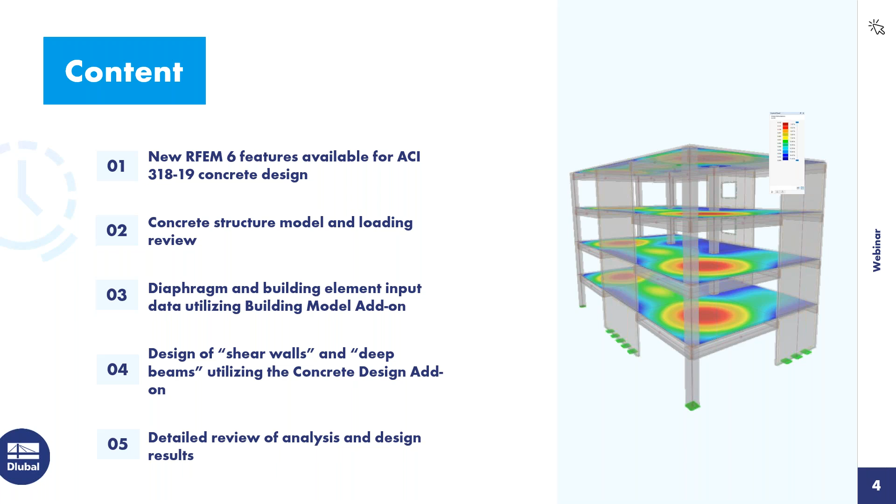For those of you not familiar with our program and the add-on concept, I want to quickly explain that for structure design related to concrete. RFEM 6 is the base program. This allows us to fully model the structure.

We can integrate with BIM software. We have access to all the materials and cross sections in the library, and this is also valid for hybrid structures as well. We can load it and then get a full static analysis.

If we want to take this a step further to design the columns, the beams, or the surfaces, we need the concrete design add-on that will go ahead and carry out the design according to the ACI or the CSA or other international standards.

We then have the building model add-on. RFEM is a general FEA program, but this building model add-on will release these building-specific features that now give us the ability to define stories as well as shear walls and deep beams.

Finally, there are many other add-ons that will be relevant, but for today I just want to mention a couple others that will be used in our example for dynamic analysis. This includes the modal analysis add-on and the response spectrum analysis add-on to generate those seismic forces. We won't be going into detail on these add-ons today, but we certainly have previous recorded webinars for both ASCE 7 and the NBC that go further in depth on this topic.

Turning now to the new ACI 318 features that have been implemented since our last webinar: we now have the ability to carry out the punching shear design check. This is for column-to-slab and wall-end-to-slab intersections. Currently, the design check will only flag the user if two-way shear reinforcement is required. There is currently no input option for that two-way shear reinforcement, but we do plan to add that in the near future.

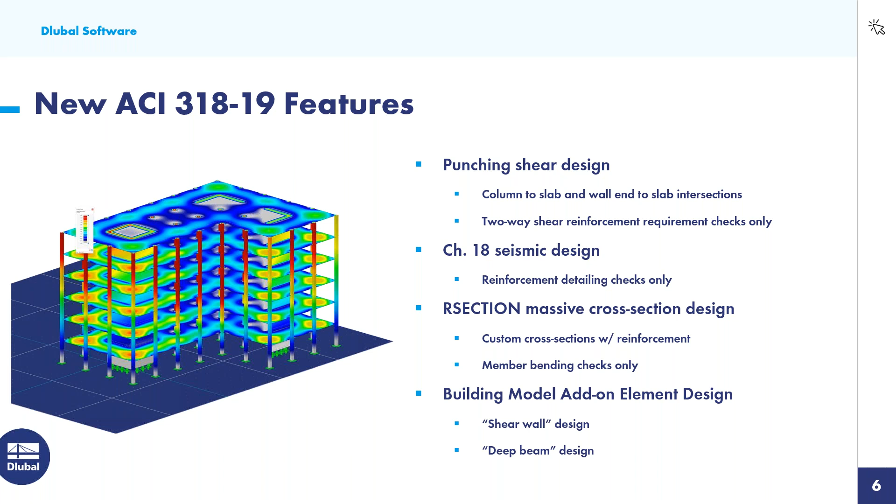And finally, we have the building model add-on that releases these building-specific features. Today we'll be focusing on shear wall design and deep beam design. So on the next slide, let us talk a little more about the shear wall design that we will see in today's example.

This does require the building model add-on integration in addition to the concrete design add-on. Essentially, we draw these shear walls with 2D surfaces within RFEM. When we define it as a shear wall, what's happening underneath the hood is that a result beam is created, and a result beam simply sums up the internal forces across this 2D surface and presents it in a beam-type manner.

We can also input the reinforcement under the shear wall dialog box. We have added this new cross ties input, which we'll see in our example today.

As far as the design checks, we will refer to chapter 11 for the in-plane design checks, as well as out-of-plane, in particular section 11.5. We'll carry out additional chapter 11 detailing requirements such as spacing and minimum reinforcement. And as mentioned, we also have these chapter 18 seismic detailing requirements, where we'll check the spacing and minimum reinforcement requirements here as well.

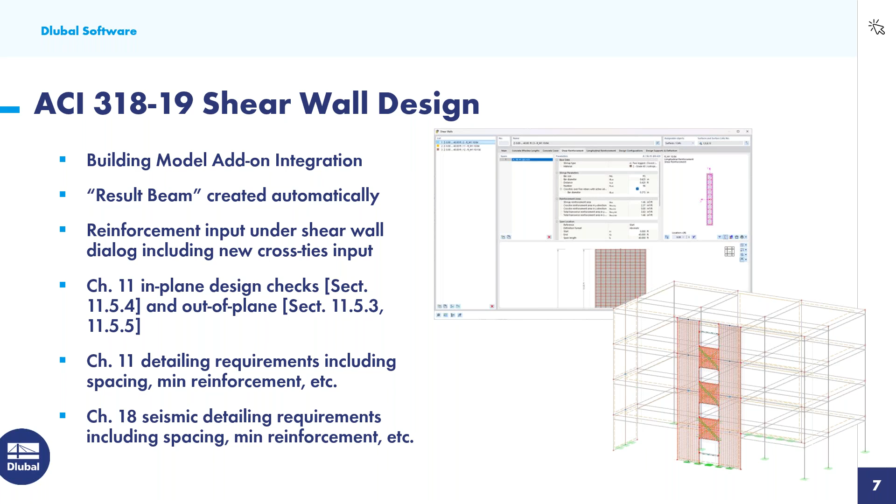Now, deep beam design follows very similar to the shear wall workflow, in that we do need the building model add-on integration. This is also defined as a 2D surface. We create this result beam underneath the hood, but instead of a vertical result beam for our shear wall, we have a horizontal result beam here to sum up all of the internal forces so that we can easily design this. The reinforcement input options are also available under the deep beam dialog box.

We have added the new diagonal coupling reinforcement input. As far as the design checks, we will refer to chapter 9 for deep beam shear strength and detailing design checks, and we can also consider those chapter 18 seismic shear strength and detailing requirements for coupling beams.

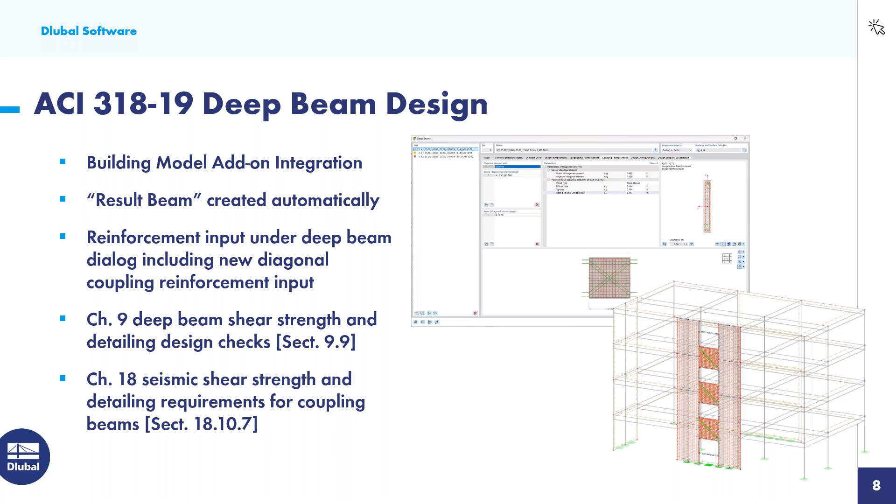With that said, we will now turn to our example within RFEM. When we begin a new model, we are presented here with the base data dialog box. Under the second tab are all of the various add-ons that we have available, so essentially you're creating a custom software package that's specific for your design needs.

For today's example, I want to begin by enabling the concrete design add-on, and then we also talked a little bit about those dynamic analysis add-ons that we'll utilize in our example here.

Under the third tab for standards, we can generate the load combinations automatically according to ASCE 7. You'll notice here the latest 2022 standard is implemented. We'll also take advantage of our automatic wind load generators as well as snow load generators.

So we can set the standard here under the second option also to ASCE 7. The concrete design is set to ACI 318, the 2019 standard, but you can see here the alternative standards that we have offered, including the CSA. And finally, dynamic analysis for the response spectrum analysis will be carried out according to ASCE 7.

Now that we have this information set, you'll notice here that I have gone ahead and modeled our concrete structure for today. So let's do a quick overview. We'll begin with the materials. Everything is defined here with 5,000 PSI concrete that was implemented or pulled in from our material library.

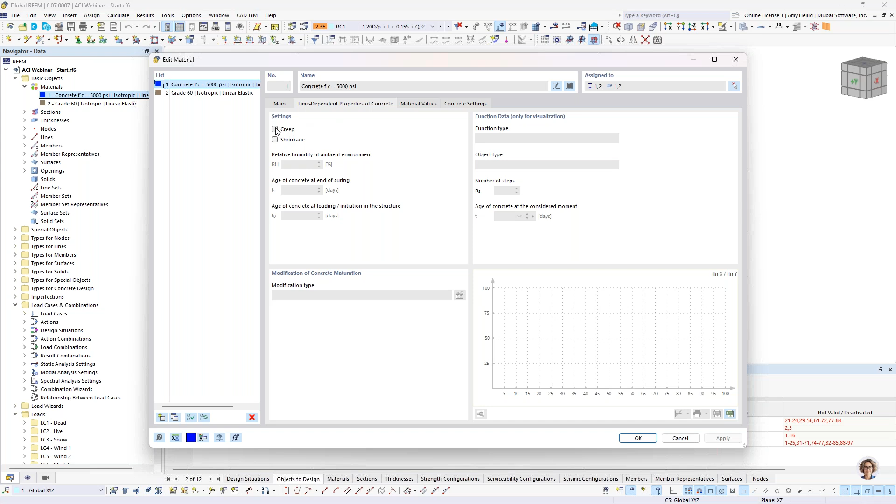Specific to concrete, we do have this second tab available to us under time-dependent properties of concrete, where we can further specify the creep and shrinkage behavior of this material. This will come into play a little bit later on for those time-dependent deflections. If we do specify creep and shrinkage, we will refer to ACI 435 for that consideration. For today, I'm not going to take advantage of anything related to the creep or shrinkage input.

So we will now move on to the cross sections. You'll notice here that the columns are defined as 20-inch by 20-inch square sections, and then we have various beams here that are supporting the slabs and spanning in between the columns.

If I zoom in here and double click on one of these members, I want to point out that the member type is not set to beam. So a beam is any standard column or beam element, but rather this is set to a rib. When we specify this under this second tab, rib, we can actually define here the effective width on the left and right hand side of this beam element.

So then we further have the ability to integrate the internal forces closed from the slab element itself from the static analysis, and then we can design it as a T-beam within the concrete design add-on.

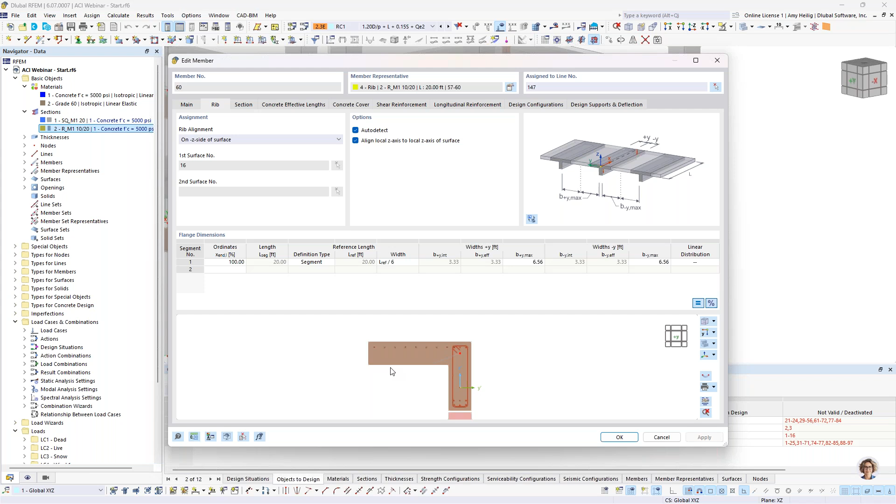Now for this rib element, we're at the edge of a slab, so we only have effective width defined here on the left-hand side. But this is unique to rib elements rather than a standard beam element. We also have the thicknesses defined here, assigned to the surfaces.

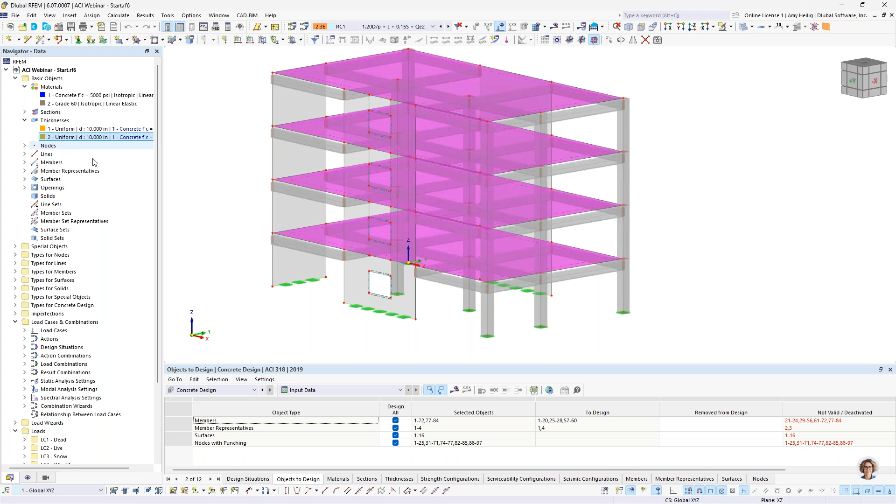For our shear walls, we have 10-inch thick concrete defined, and for our slab elements, these are also 10-inch, 5,000 PSI concrete. Down at the base of the structure, we have nodal supports at the columns that are rigid, and we also have a fully rigid support at the base of our surfaces, defined as a line support.

So we'll now move on to a loading overview. Going into the load cases and combinations dialog box, you'll notice under the load cases that I have defined dead, live, snow, and wind.

These are our static load cases. Once we have these defined within this dialog box, we actually need to apply the loads graphically to the structure. So we'll go back and take a look within our drop down at the dead load case. Self-weight is automatically considered internally for all of the elements, but I have added an additional surface load here of 50 pounds per square foot.

Now, we are not confined to applying a surface load, as you can see with this option in our toolbar, to the entire surface itself. Rather, we also have these options next to it called free loads. For example, a new free rectangular load could be applied to just a certain portion of the surface rather than the entire surface as a whole.

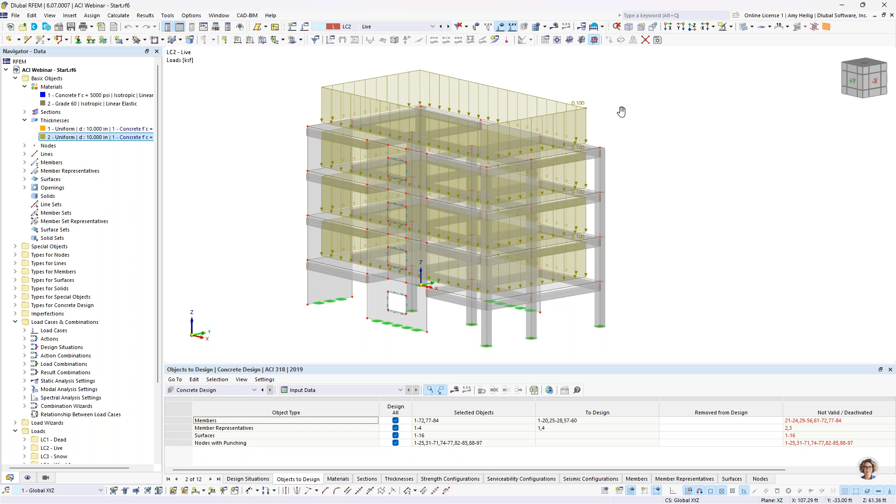We also have the live load case here, same concept. The magnitude for the surface load was increased to 100 pounds per square foot. Then we have our snow load here at our roof level.

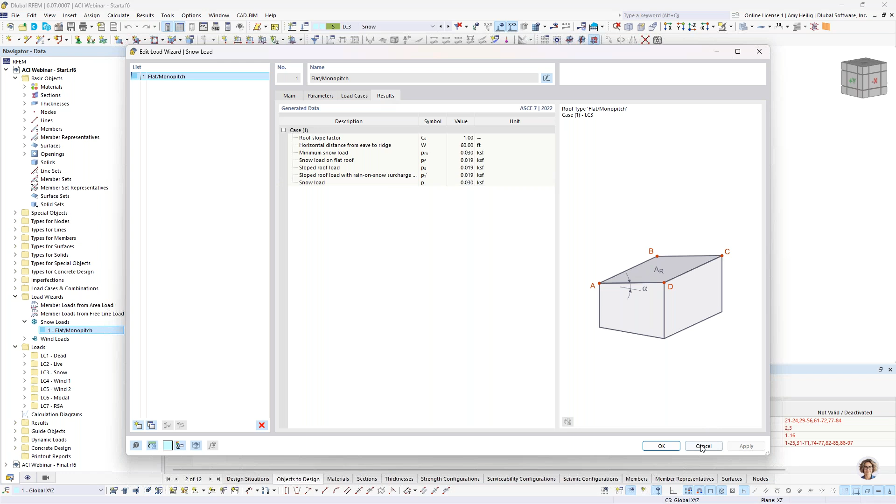And for this, I took advantage of the load wizards that you'll find in our dialog box. Under the load wizards, we set this to the ASCE 7 so that we can automatically generate the snow and wind loads. If I go into this dialog box, you'll notice that we just specify the geometry, input in the parameters specific to the ASCE 7, and ultimately the program is going to calculate these snow loads for us.

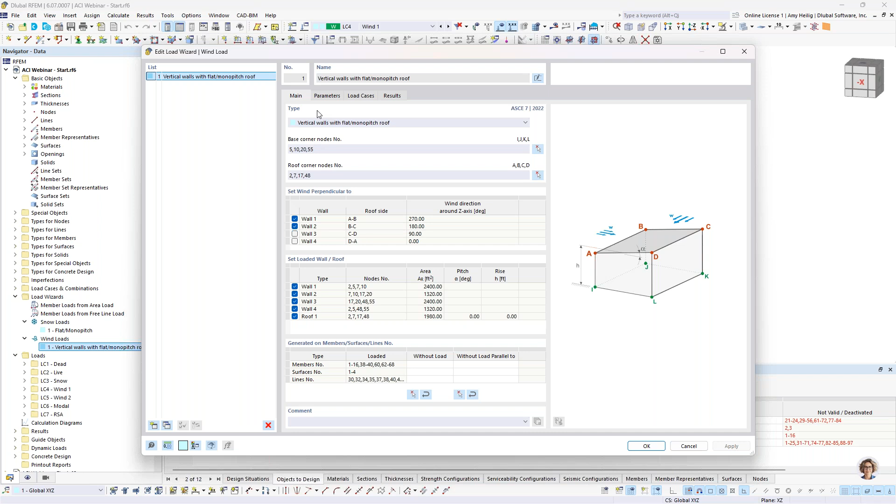Now, very similar, we have our wind load generator. If I toggle here to my wind load case, we see this applied lateral load. I'll go into the wind load dialog box here. Again, we input in the geometry points, the type of roof, and the parameters specific to the ASCE 7, and then the program can generate all of the wind load cases from case 1 and case 3 from the ASCE 7.

For this simple example, I am just generating the minimum wind loads in both directions, so that's why everything else is unchecked here. So for our first minimum wind load, we can see this applied area load laterally here in the global Y direction.

If I'm interested, I can always right-click to display separately, which is going to show me the loads applied to the structure based on the tributary areas. Now, if I'd prefer, I can turn this back off for a cleaner area load display instead. And then similarly, we have wind load in the other direction with that applied area load.

So going back to our load cases and combinations, I also have a couple of dynamic load cases here as well. I'm not going into detail with this, as it's covered in those previous webinars you can find on our website and YouTube channel, but we do have a modal analysis load case where we're going to carry out the eigenvalue analysis to determine the natural frequencies, vibrations, and mode shapes of the structure.

We can import in here a mass combination for this calculation. And then we also have our response spectrum analysis load case, where we're going to refer to the ASCE 7 to generate these seismic loads in the orthogonal X and Y directions. And ultimately, once we have all of these load cases set, we need to combine them into the load combinations.

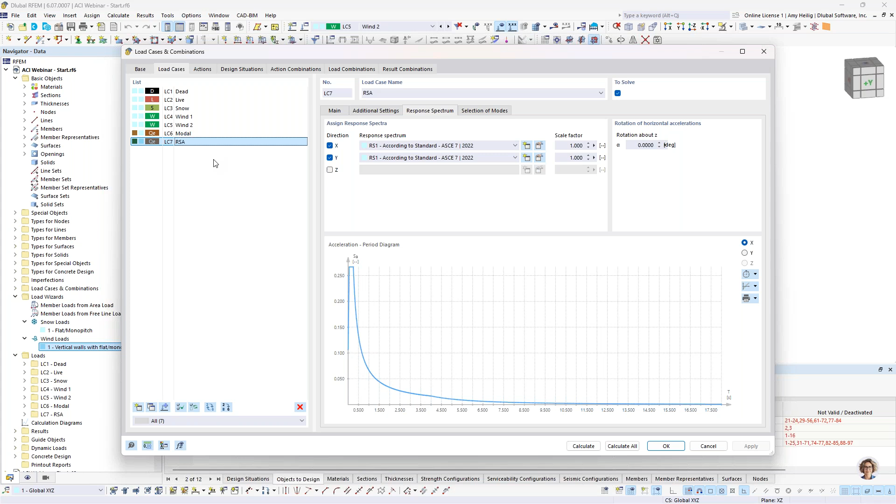Under the design situations here, you can see that the program automatically groups together these load combinations into what we call a design situation. So we have our first two design situations here in orange that include our factored load combinations from ASCE 7, 1 through 5.

And then this second factored design situation includes all of our seismic loads, combinations 6 and 7, directly from ASCE 7. We can click this info button here to see that information pulled directly from the standard.

Now we further have a couple design situations here for our unfactored loads: the ASD load combinations 1 through 7, and then 8 through 10 that include those seismic forces. These design situations are ultimately needed within the concrete design add-on, and we'll see later exactly how we assign the limit states to these different design situations. For now, just think of these design situations as grouping together the load combinations.

If we're interested, we can click on the load combinations tab and see the load combinations listed out individually. Our factored load combinations in orange belong to that first design situation, and we have our unfactored load combinations here belonging to the third design situation.

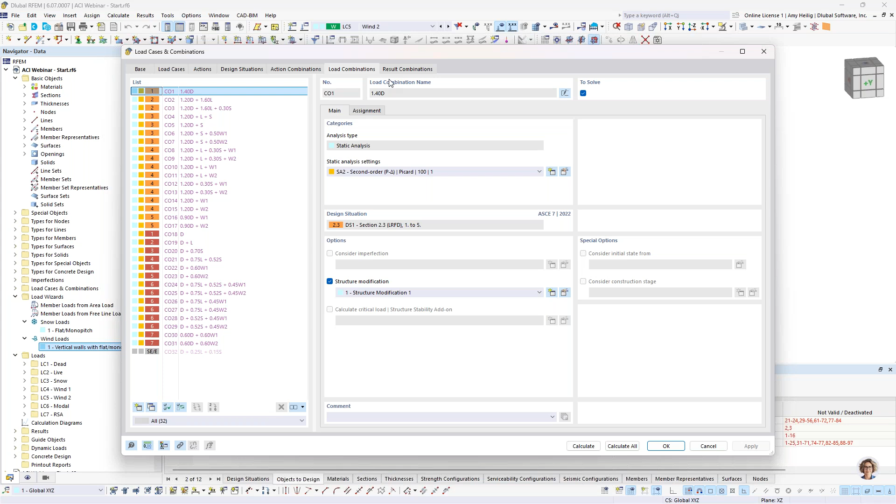This is different from a load combination that is automatically carried out according to a second order analysis considering P-delta effects. Again, this is covered in the response spectrum analysis webinar, but ultimately these result combinations also belong to those design situations.

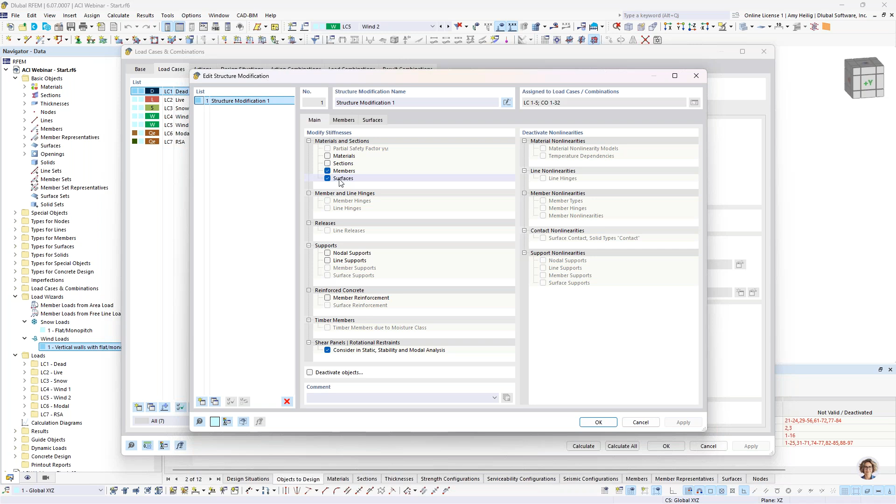One more thing I want to touch on is that for the load cases, I have a structure modification set here, and this is really important for concrete design. If we take a look at this definition, I have enabled both members and surfaces because these are the two elements we have in our model today, and then I get two additional tabs up here at the top.

Within my first definition type here for members, we have the ability to directly select ACI 318, which refers to table 6.6.3.1.1(a) to apply those I-crack factors to our member elements within the model. We would want to select whether this is a column or a beam, and we can see the relevant stiffness modification factors given here.

So once we have this definition, we can graphically select all of the column elements within the model that this stiffness reduction should be applied to, and the same exact concept applies for our beam elements.

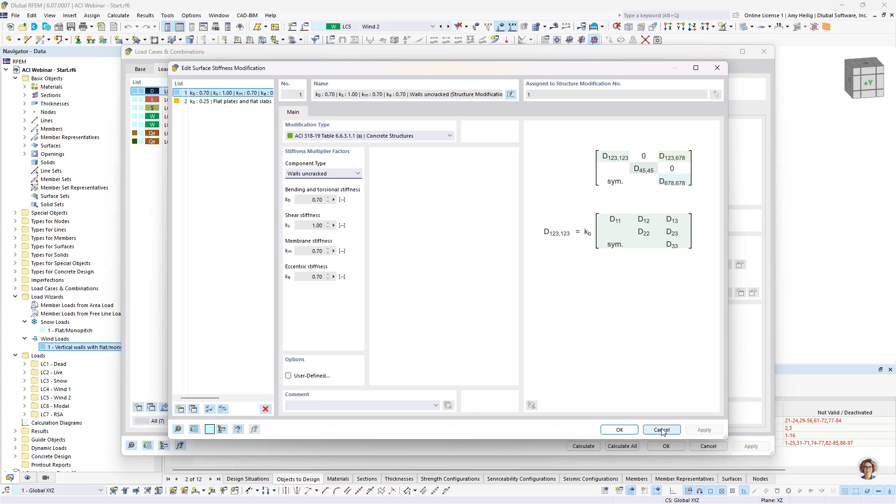In a very similar manner, we also have the surfaces tab, where I created my first definition by simply selecting ACI from this dropdown, then choosing whether it's walls uncracked, walls cracked, flat plates, or flat slabs. This refers directly to the ACI for those I-crack factors, and then we can graphically select the surfaces that this stiffness reduction should apply to.

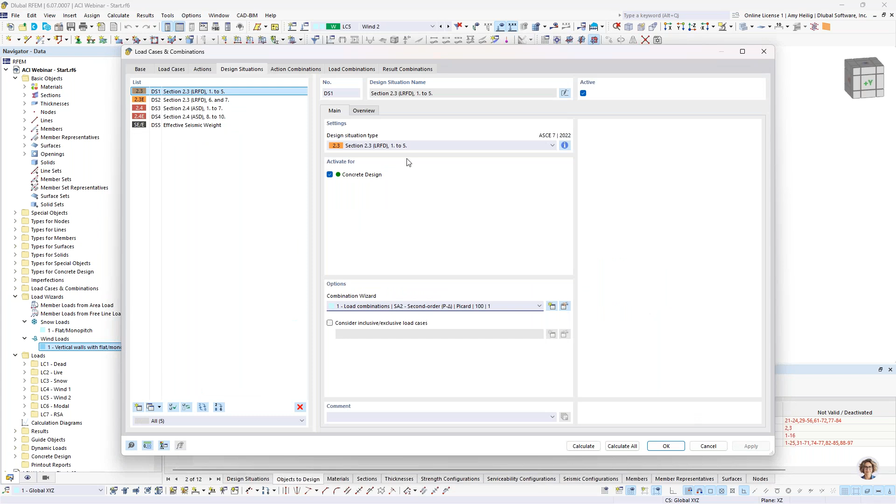So we could go ahead and apply this to all of our load cases. It's also possible, under our design situations, especially these factored design situations, to go into the combination wizard options and activate this structure modification there as well. By doing it within the design situation, you'll see that the load combinations automatically include those I-crack factor stiffness reductions as well.

So now that we have covered the loading and the structure, it's time to input the reinforcement specific to the concrete design add-on that we have already enabled within the base data dialog box. Before we begin, notice that we have the concrete design option available within the dropdown of our table. When we select this, there is an option called global settings.

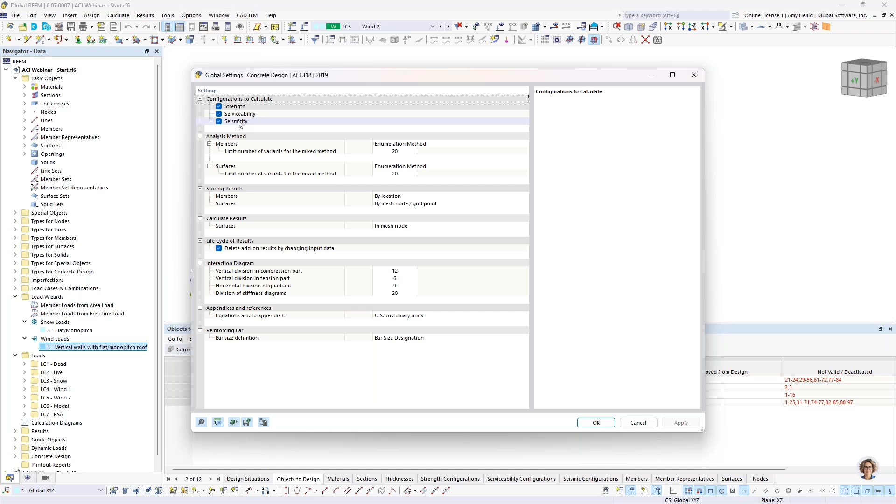By default, the strength and serviceability design checks will always be carried out. But if we want to further carry out those seismic detailing checks, we would want to go in here and turn this on, because by default this is typically not enabled. So we'll go ahead and do that for today.

Okay, so we want to talk about the reinforcement input for a column. If I double click on this column, you'll notice that the design property checkbox is turned on. This is telling the program that not only are we interested in carrying out the static analysis within the base program, but I also want to utilize that concrete design add-on to input the reinforcement.

Now, when I turn this off, you'll notice all of these tabs disappear. This is simply telling the program that we're only interested in the analysis. So we certainly could carry out the reinforcement input here within this single column, but I do want to talk about the benefit of what we call member representatives.

Currently I have this turned off graphically within the model, so I'll go ahead and turn that on. You'll notice that we have a lot of color-coded dots here for each one of these members. This is because the program has grouped together identical members in what we call member representatives. Members that have identical cross-sections, materials, lengths, and possibly even for concrete, the same reinforcement input will all be grouped together here.

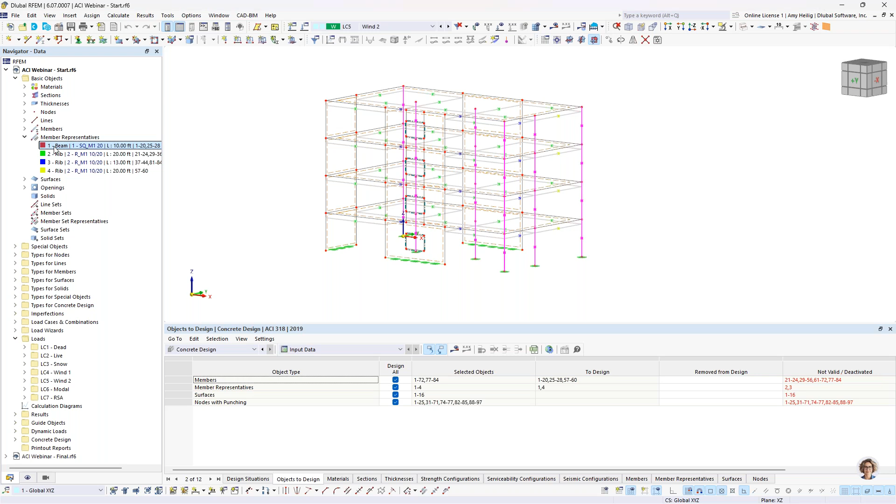Now, the benefit is that if I take a look at member representative number 1 here, you'll notice that this has grouped together all of my columns. We see this highlighted in the background. Well, I have these exact same tabs here to input the reinforcement as I do with the individual columns.

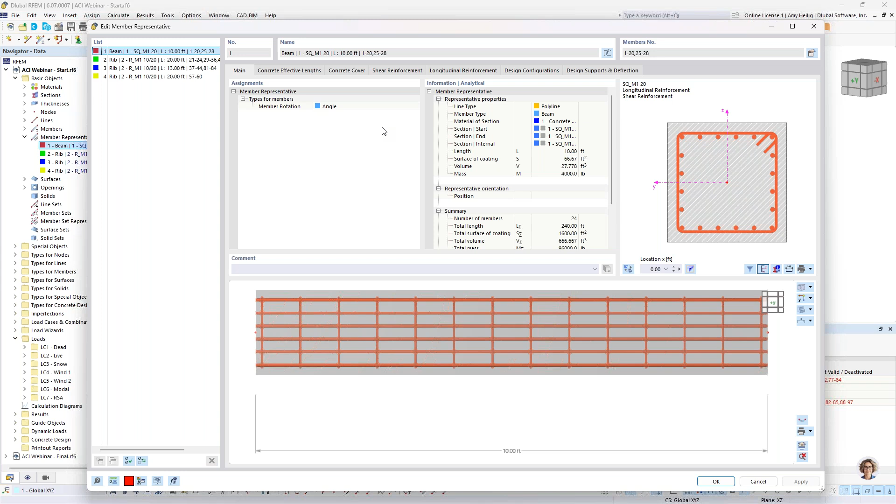The benefit is that if I define the reinforcement here within the member representative, it's applied to all columns at once. If I need to go in and make a change, I do it within the member representative, and again, it's going to affect all the columns defined here. So we will go ahead and input these various tabs, and I'll go through these in detail.

The concrete effective length: if we are carrying out a first order analysis and utilizing the moment magnification method, we would want to go ahead and input an effective length. However, if we are designing to second order analysis and considering P-delta effects, which we are within our load combinations today, we don't really need to do anything within this particular tab. So we'll go ahead and design according to second order analysis.

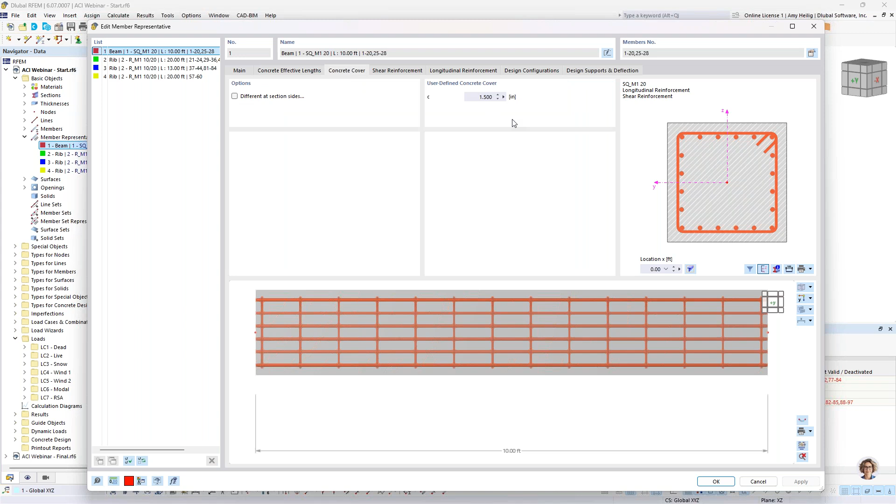Now the concrete cover should be input. This is left here at 1.5 inches, which is the default.

Now I went ahead and input the shear and longitudinal reinforcement for these members, so we'll just go ahead and give a quick overview. The shear reinforcement is set at number 4s at 9-inch spacing on center, so we can see that spaced out evenly along the member here.

Now it's entirely possible to create different zones for both our shear and our longitudinal reinforcement with this option in the lower left-hand corner, and then we can modify the span location. So for example, if we wanted maybe closer spaced shear ties at the ends of the member versus the center, we could create a couple different zones here.

The longitudinal reinforcement, you'll notice here that I have selected the option from our dropdown as uniformly surrounding for the longitudinal bars. I have defined 20 number 6 bars, so the program will go ahead and place these around the cross section as shown.

Now we do have additional options here to define a development length if we would like. You can see that within the dropdown box here where we can see the development length shown graphically. We can modify that development length itself in terms of feet. For today's example, I'll go ahead and leave all of the development lengths off, but that is where you would want to input that information.

Now, the design configurations - I'm only going to go through this tab once because it's the exact same application for all elements that we are designing. We have here these strength configurations to begin. If I go into the default setting, you'll notice that we have 4 different tabs depending on which element we're designing, whether it's a member or a surface or even punching shear. These are going to be all of the various options specific to the strength design checks according to ACI.

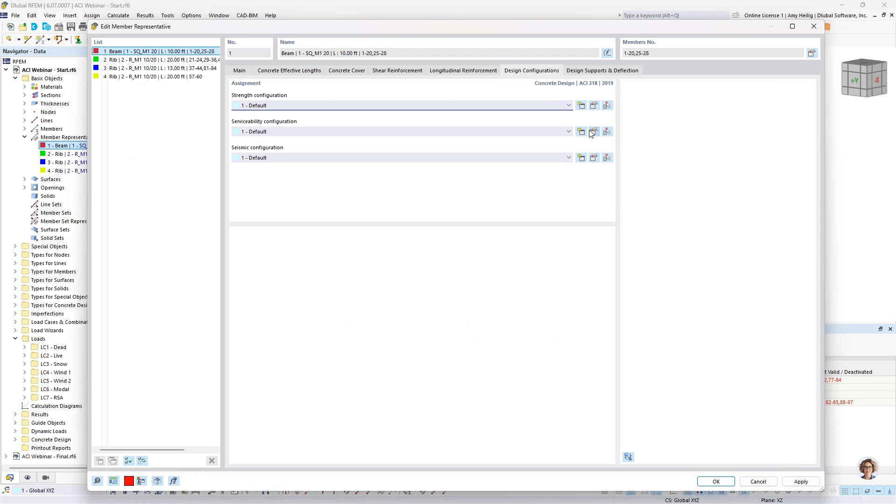We also have the serviceability configurations here. Again, this is specific to the serviceability design check. For example, we can calculate the crack width. For surfaces, we have minimum reinforcement due to shrinkage and temperature. We can also check deflections, whether that's simply supported or cantilever beams or columns, and this can also be carried out for surfaces.

And if you remember, we talked a bit about time-dependent deflection. I mentioned that under the material properties, when we input creep and shrinkage for that material in more detail, we probably want to toggle this to refer to ACI 435. This is a far more complex approach within the serviceability design checks for long-term deflection.

Alternatively, when we leave this as default with the factor according to ACI table 24.2.4.1.3, we're simply going to apply some type of factor to the immediate deflection based on the duration of the load—a much more simplified approach.

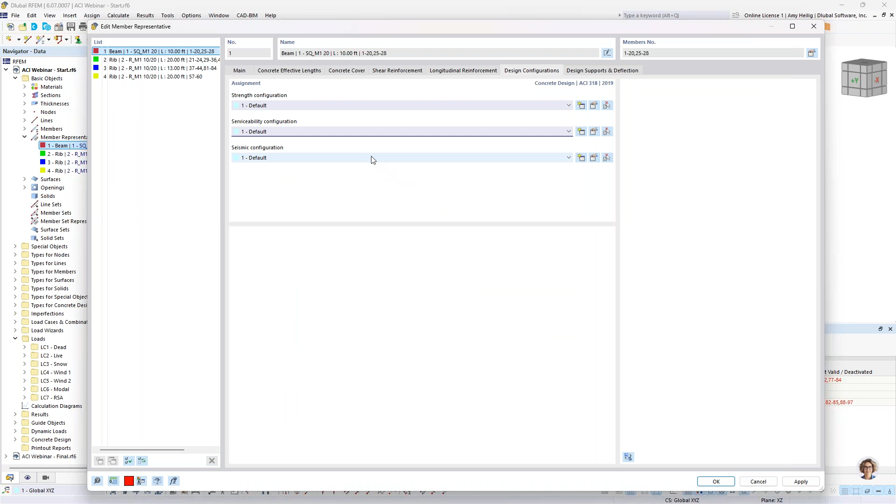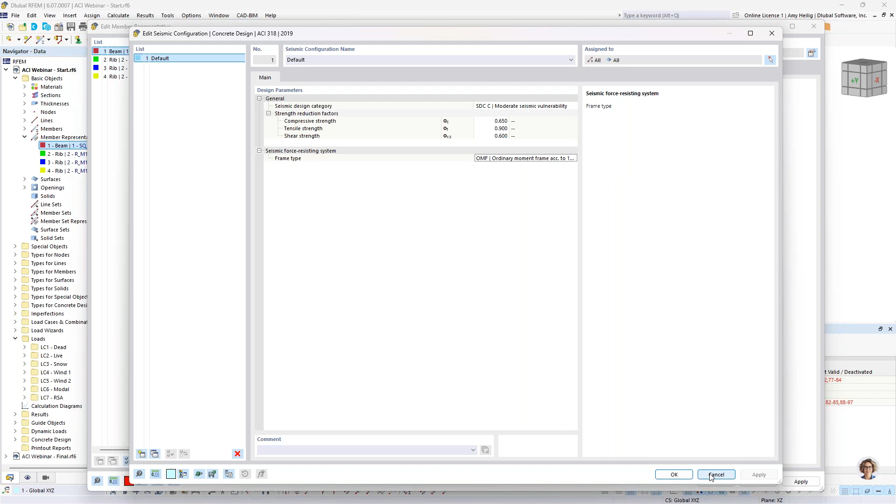Okay, and finally we have the seismic configuration. For the seismic detailing checks, we can select for our members whether the seismic design category is one of the options from this drop-down. We also have the frame type here, set to ordinary, intermediate, or special moment frame. This is applicable to members and surfaces for those additional detailing design checks.

And finally, we have the design supports and deflection. If I input nothing within this tab, the program assumes this member is supported at both ends and refers to the limiting deflection ratio for simply supported members. In contrast, if we have a cantilever, we probably want to assign a design support at the left or right end so the relevant deflection limit is referred to. I'll leave this as simply supported for our column elements, but we'll see in a minute how we can set this differently for our rib members.

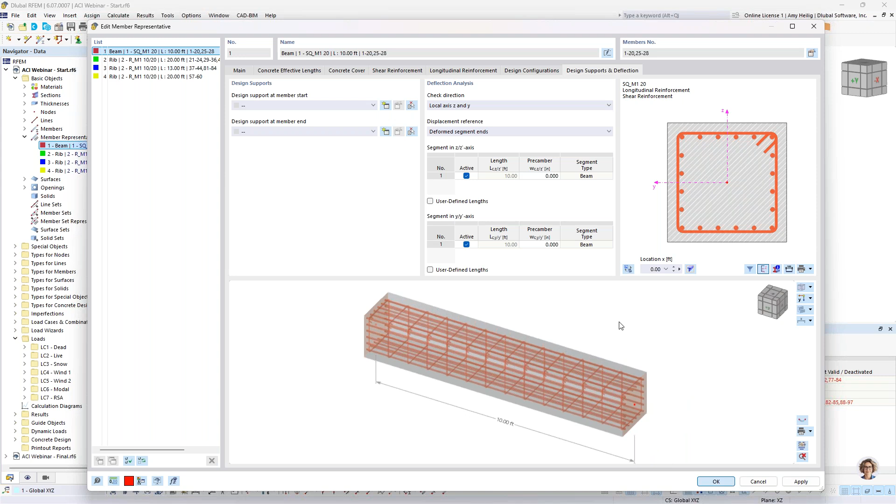So once this information is done, we want to move on to the reinforcement input for our rib members over here on the right-hand side. Very similar to the columns, these are all grouped together in a member representative as well. If we take a quick look to review this, because it's a rib member, we include the effective width of the slab for the member design. And we run through these various tabs.

Concrete cover is set to 1.5. The shear reinforcement is number 4, set at 6 inches. Again, we could set different zones if we would like.

The longitudinal reinforcement is going to be a little more detailed than what we saw with the columns. You'll notice I have 3 number 6s set to symmetrical, so this places 3 number 6s at the top and 3 at the bottom, currently highlighted. We also have an additional 3 number 6 bars defined at the bottom with what we call the rebar type line.

This line option allows me to place a line of reinforcement, and I can specify the different offset either left, right, top, or bottom with this input option. Finally, we have 8 number 6s defined in that surface effective width itself, also defined with the line option. I modified the offset here to 8 inches so we can input this longitudinal reinforcement within the slab element. This is pretty simplified for today since we'd probably want to create different zones with different longitudinal reinforcement, but this is just a brief overview for this simple example.

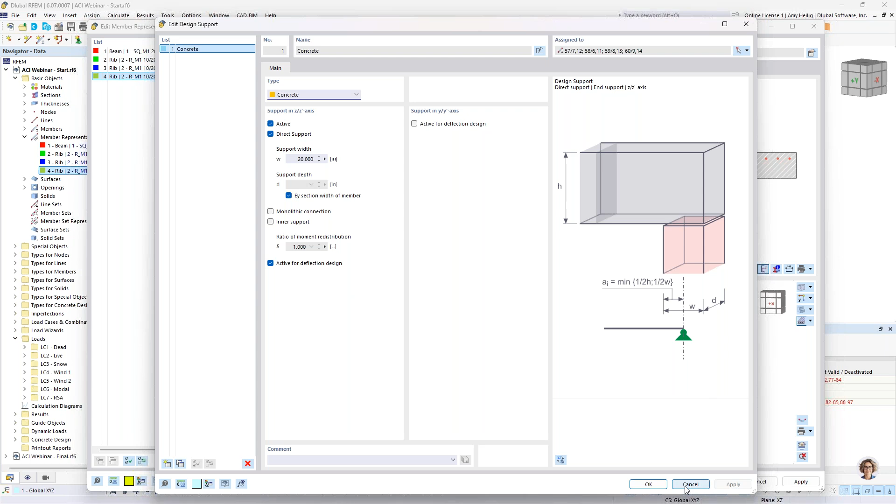Once we create that support, we can select that same definition type here at the member end, and we actually see the support shown graphically in this dialog box. So this is how we can consider that reduction of the shear force.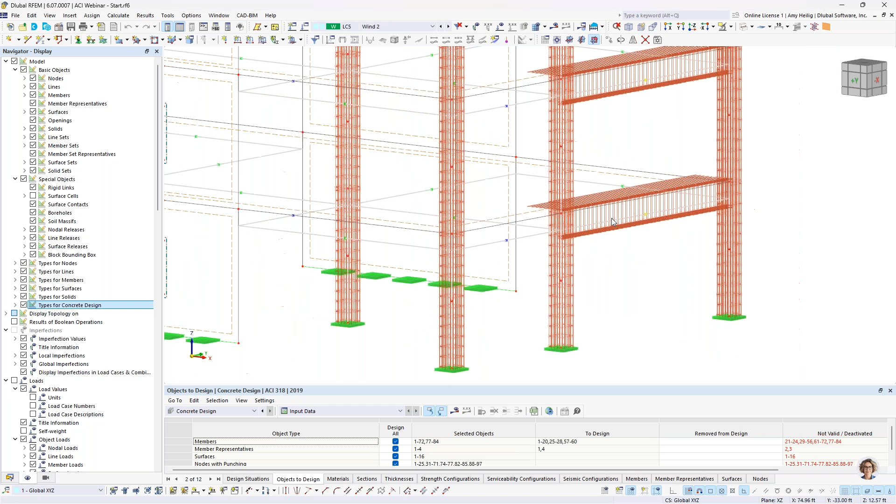Now that this information is input for our beams and columns, if I go to my second tab under the navigator and turn this into wireframe view, we can actually view the reinforcement that we have input graphically in the global 3D model. This is only specific to the elements I have defined so far. If you feel that's a little overwhelming, you can always turn that off.

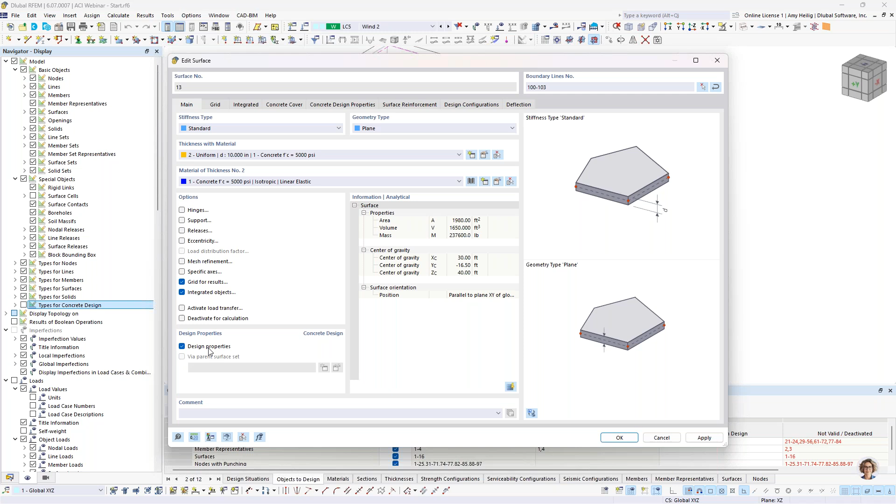Now, to talk about the surface reinforcement, I'm not going to go through this. This was covered in a previous webinar, but it's the exact same concept where we can activate the design properties and input the surface reinforcement. Similarly, for punching shear checks, we want to choose one of these nodes where it's framing into that reinforced slab, and double click on it. Very similarly, we have a checkbox for punching design and an additional tab that refers to the strength configurations for those punching design checks. We won't be doing either one of those for today's example, but I just wanted to mention that.

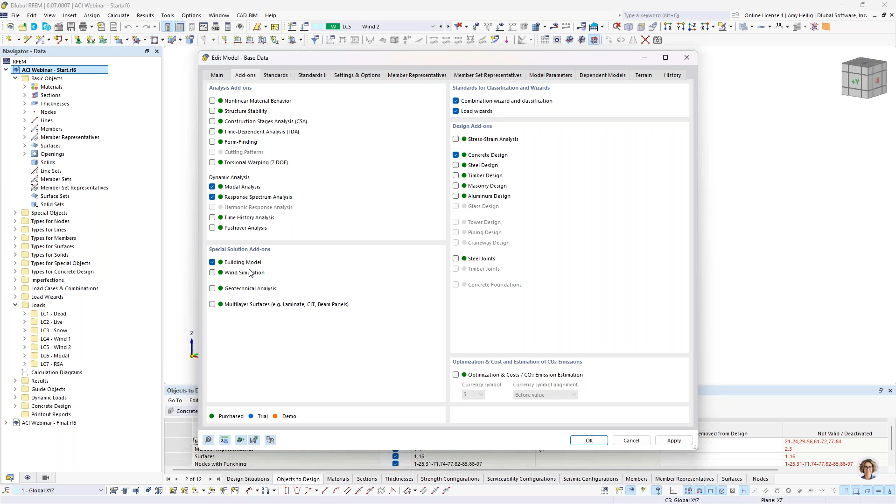So now it is time to move on to the building model add-on. For this, I want to right-click to activate the base data dialog box, and under the add-ons, we will turn on the building model add-on. I click OK. At first glance, nothing changes graphically here.

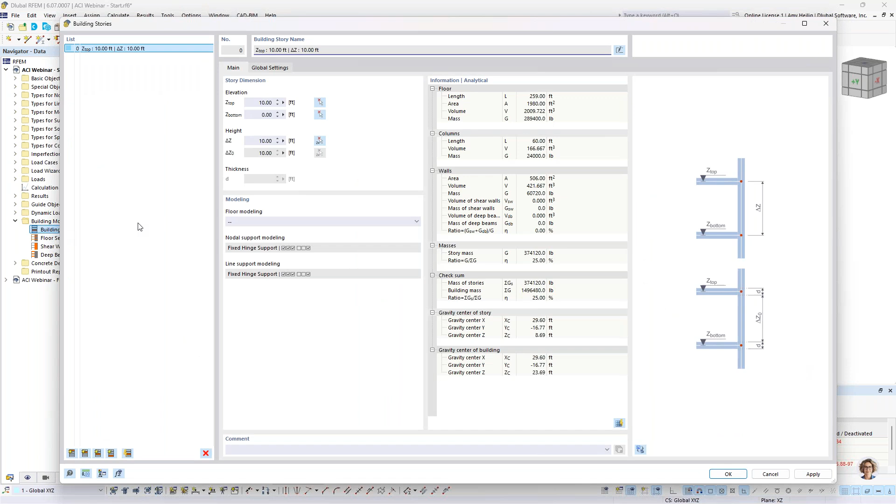The only thing we now have access to in our navigator on the left is a new folder called the building model. So we can now define our building stories in this general FEA program. I'll double click on this dialog box, and the program will automatically assume we want to create our first story, detecting the height of that first level. We'll continue to create the additional stories above it with the option in the lower left-hand corner, for a total of 4 different floors.

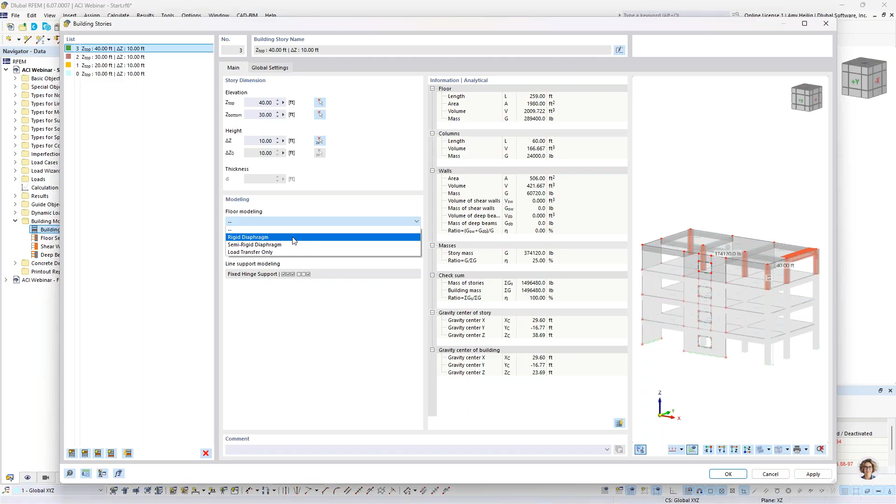Now, once we have created the different stories, for each one of our floors we now have the ability to assign a diaphragm to this particular floor or to all of the floors, including rigid, semi-rigid, and load transfer only. So let us go back to the PowerPoint because I do want to discuss the building model add-on concept in more detail, as well as these different diaphragm options.

As mentioned, RFEM 6 is a general FEA program. We are not restricted to only building analysis and design. Rather, we can model tanks, silos, fabric tensile structures, maybe an FEA of a steel connection. Really anything is possible. But this building model add-on is releasing building-specific features in this general FEA program, such as the ability to define stories. We also have the option, which we'll see in just a minute, to define shear walls and deep beams.

The added benefit of the building model add-on is that once we run the static analysis and even the dynamic analysis, we get additional results available in table format for results by stories. For example, if we're looking at a response spectrum analysis, we can actually view the story shear or the base shear in table format. For static or dynamic analysis, we can also view the shear wall forces in table format, and export that out to Microsoft Excel quickly. If we have a rigid diaphragm, we'll be able to view in the table the center of rigidity, as well as graphically where that center of rigidity occurs. So many more options, specific to buildings, will be released.

Now, as mentioned, we have these various diaphragm types available. We recently released semi-rigid diaphragms, so now we have all 3 options available to you, including rigid, semi-rigid, and what we call load transfer only, otherwise known as a flexible diaphragm.

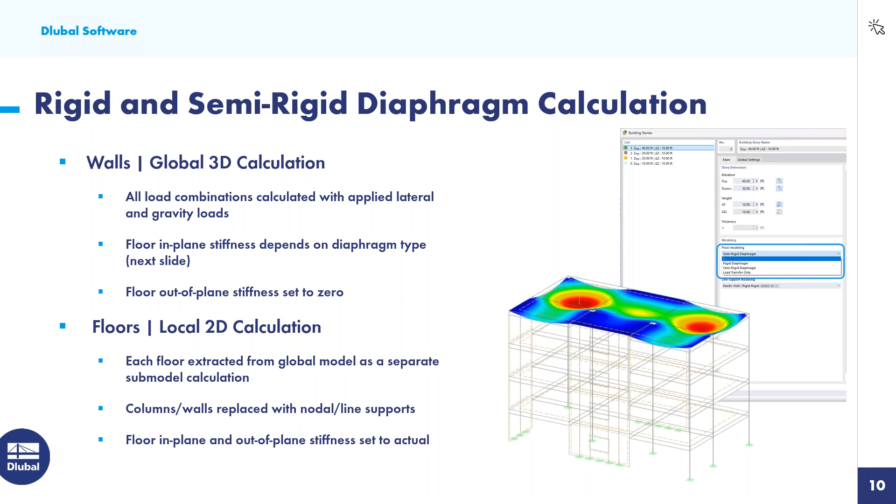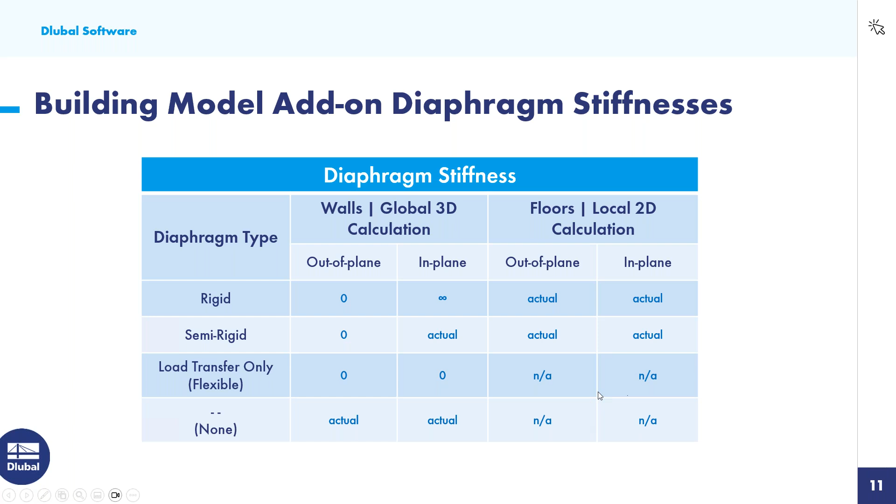So we'll go back to our example today, and for all 4 of my floors, I'm going to define here a semi-rigid diaphragm. Remember, for rigid or semi-rigid diaphragms, when we carry out that separate 2D calculation, we're replacing the walls and the columns underneath it with line and nodal supports.

Rather than having those line and nodal supports set to fully fixed or fully released, the program can actually calculate the true stiffness of those elements framing up underneath it, and we can create an elastic support condition here with a spring stiffness set. So that's what I'm going to use today. I want the program to refer to the true stiffness of those elements framing up underneath it.

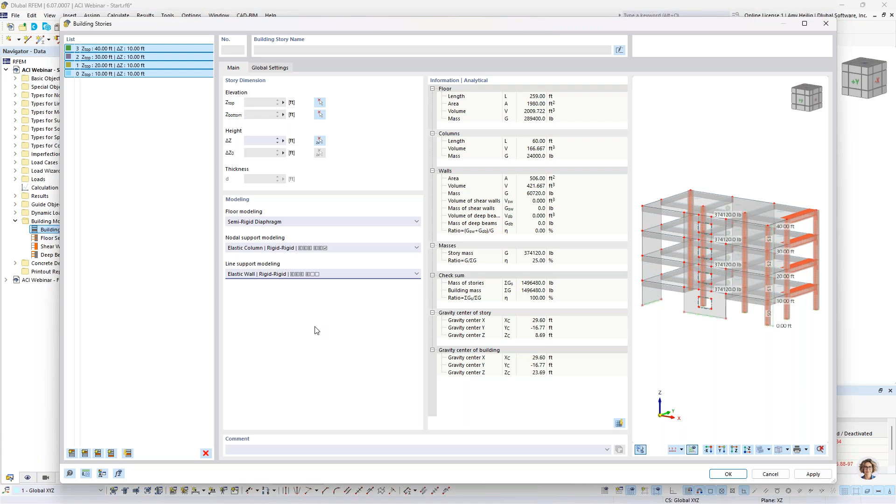Once we have set this information, if I double click on one of my floor elements, the stiffness type is now set to floor slab semi-rigid diaphragm. I can't modify this because it's defined directly within the building model add-on.

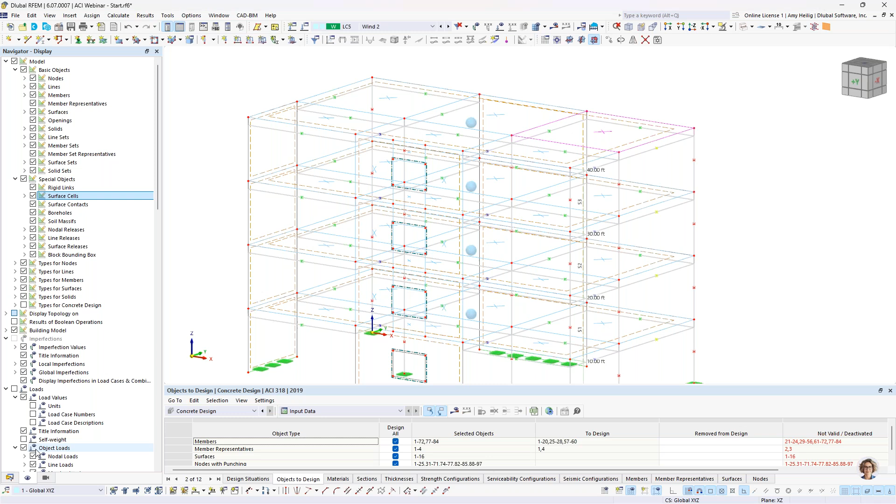In addition to the building stories that have been defined here, we now have the ability to create our first shear wall definitions. Before we do, I'm going to activate what we call the surface cells, which I had turned off graphically, and I'll go ahead and turn those back on. Surface cells are automatically turned on when we enable the building model add-on, and you can see it creates these surface cells at various portions of the structure on the surface elements themselves.

I'll turn this into an elevation view and highlight only my front shear wall. Here we have our 4 shear walls displayed graphically, and you'll notice those surface cells for the shear walls at the 2nd, 3rd, and 4th level are shown. This is really helpful because it will help us define what is a shear wall on the left and right hand side versus what's a deep beam spanning between these openings.

Now for this first shear wall, you'll notice that I don't have those surface cells. So anytime you have a shear wall with an opening, what we need to do to generate these surface cells is create a line element that spans from the opening to the edge of the surface. We certainly can do this manually with the new line option in our toolbar and just graphically drawing that line, but I'd like to show you a quick trick.

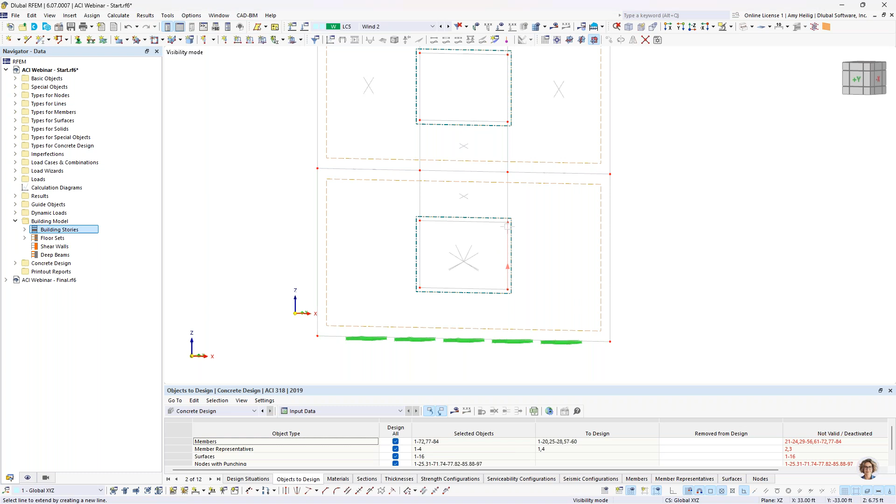With our drawing tools at the bottom, we have this option to extend the line graphically, something you might find similar in AutoCAD. When I choose this option and hold down the Alt key on my keyboard, the program will automatically extend this line when I click on it, on the upper left and right hand sides, without affecting the opening. I'm going to do so at the bottom right and at the bottom left. Now you can see those line elements are automatically created without affecting that opening, and the surface cells were automatically detected when we do this. So in case you have a shear wall with openings, you certainly want to take this workflow.

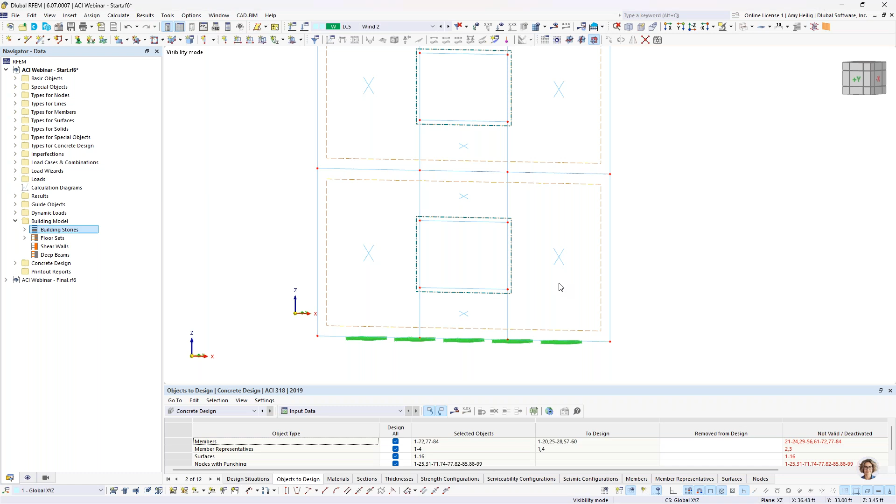So now we can define our first shear wall by right-clicking within our building model folder, and we create our first shear wall definition. We want to select the surfaces or the surface cells, so I'll graphically select all of my surface cells on the left-hand side of this opening to define one continuous shear wall on the left-hand side. Once this is done, I'm going to create a new definition type and do the same thing on the right-hand side of the openings, giving us one more shear wall definition.

For this one, I'm going to cancel out the visibility and go back to a rendered view because I want to create my third shear wall over here on the left-hand side. Notice this one doesn't have any openings, so we can just directly select the surface itself without having to worry about the surface cells.

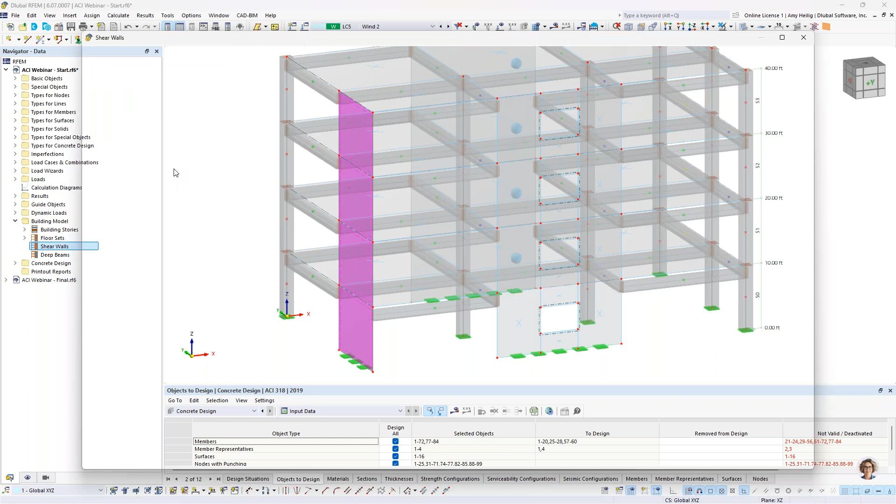So once we have input the shear wall definitions, we can hold down our shift key to select all of them because I'm going to input the same options for all 3 shear walls at once. The first option here is to generate the results section—remember I talked about how that result beam is created underneath the hood—then we can present the internal forces that are summed up over these surfaces in table format. That's what we're enabling for the static and dynamic analysis. Now, very similar to our columns and rib elements, we want to turn on the design properties because we'd like to design these in the concrete design add-on.

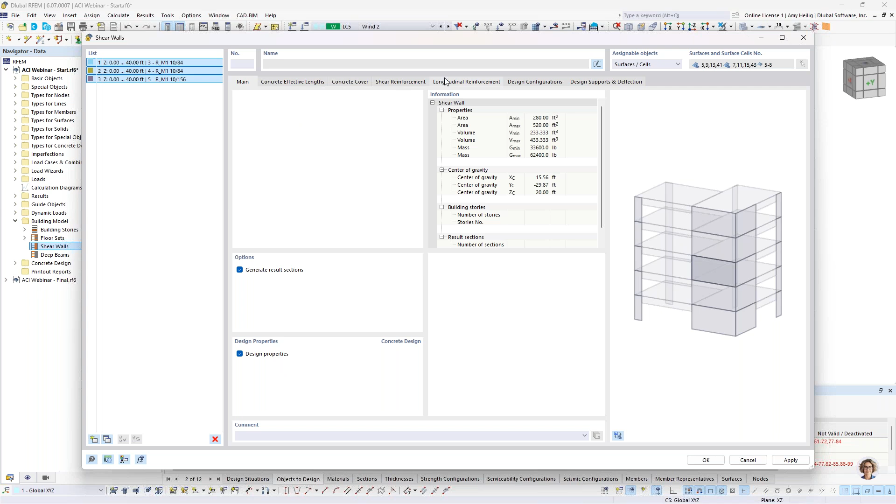And then we have the additional tabs up here at the top. So the concrete cover is going to be set at 1 inch for our shear walls.

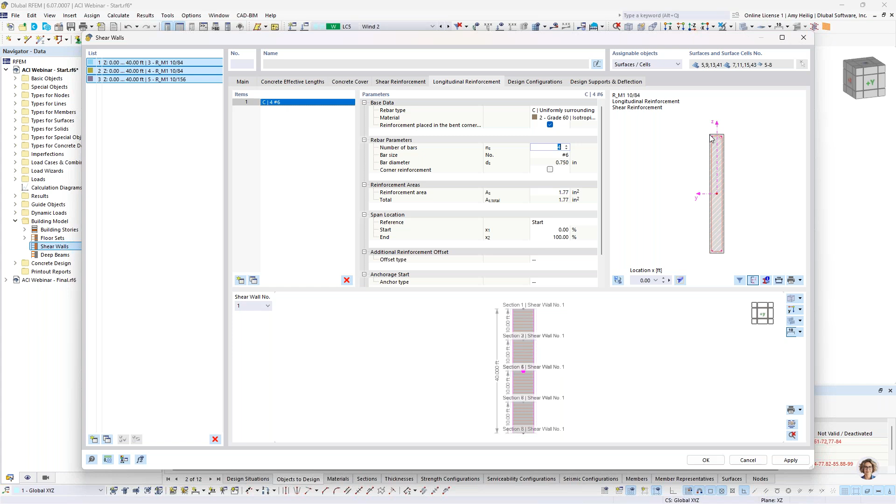I'm going to jump here to the longitudinal reinforcement first, and select the option uniformly surrounding. With this option, I want to place the reinforcement at the bent corners of my stirrup, and the number of bars is going to be set to 22 number 7s, selecting number 7 bars from my drop-down box.

So then the program just places these longitudinal bars all the way around the shear wall. We're looking at it in a plan view here. Now the only modification I want to make is to shear wall number 3. This has a much longer width than the first couple shear walls, so we'll increase the longitudinal reinforcement to 40 number 7s, and we see that adjust graphically.

So now going back to the input for all 3 shear walls, we'll go back to the shear reinforcement. I am going to select number 5s from my dropdown, and adjust the spacing to every 5 inches, so 0.417 feet.

This is a new option we've added within the shear walls, to generate what we call the cross ties when I activate this checkbox. So now we see those cross ties enabled across all of the longitudinal bars here.

Now, if you don't want to consider a cross tie at any one of these locations, you can just graphically click on the longitudinal bar here in our preview, and that cross tie will be deleted. If you want to add it back in, click on the longitudinal bar again, and you'll see that cross tie considered.

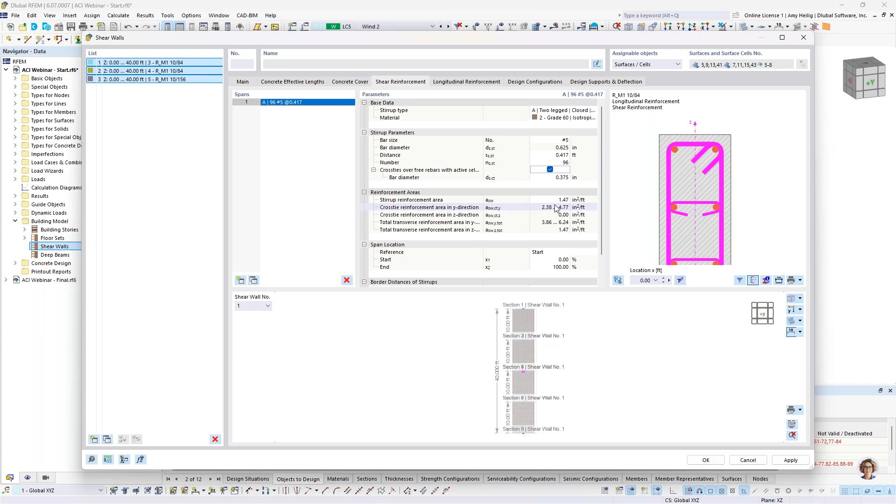Now, lastly, we have the design support. Very similar to what we saw with our member elements, we can also add design supports where it's framing into the slabs or the floors along the height of our shear wall.

So for the start and end of the shear wall, I'm going to create a new design support of the type concrete. The support width is going to be set to 10 inches because this is how thick my slab is, framing in the transverse direction. For this one, it will not be an inner support.

I click OK, and then I can select this new definition within my dropdown, and we can zoom in here and see that design support shown graphically at the start and end of the shear wall.

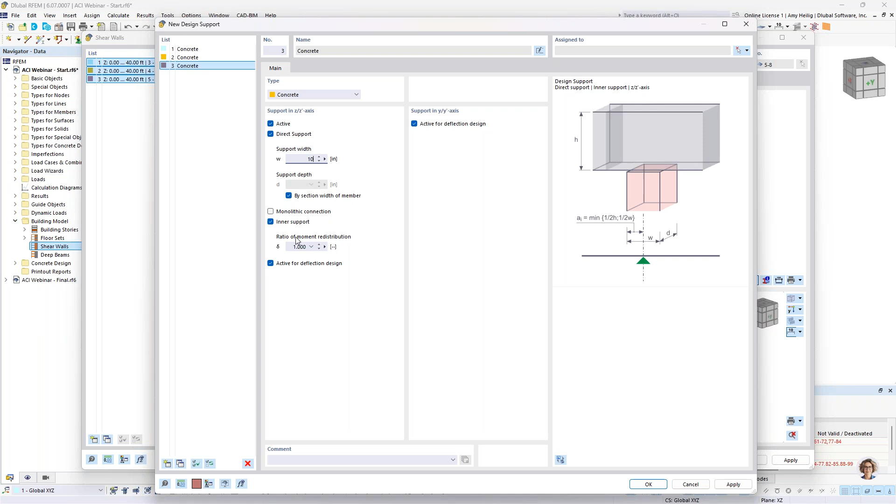Now for my interior support, we can go ahead and create a new definition type. Again very similar, 10 inches in width, but this time it will be an inner support. And we can select this from our drop-down box for all of the interior support options.

Now you can also hit F8 on your keyboard to copy the cell from above into the current cell. But now we see those support conditions modeled along the height of the shear wall, again representing those slabs framing in at those transverse locations.

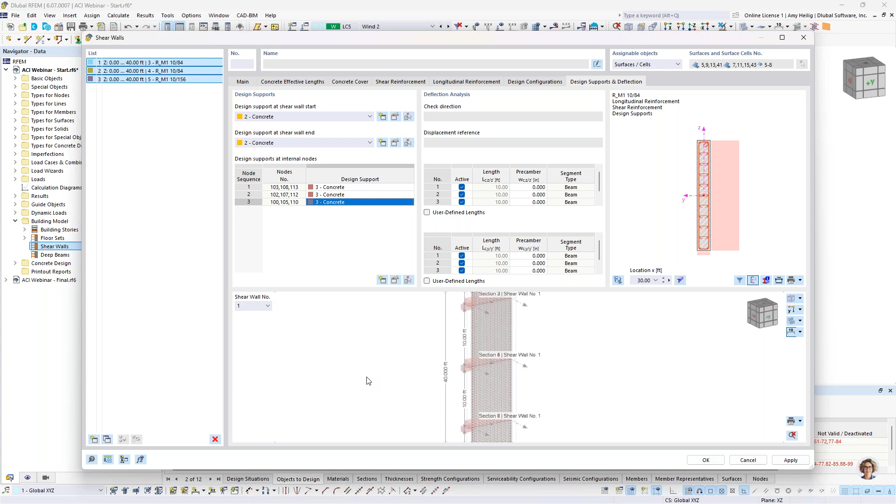All right, so now that we are done with our shear wall input, let us talk about deep beams. This is really going to be a very similar workflow. We're going to begin here by right-clicking to create a new deep beam.

And the program will ask us which surfaces or surface cells we want to consider. So I'm going to zoom in here and choose the 2 surface cells that are spanning between the openings of my first and second floor.

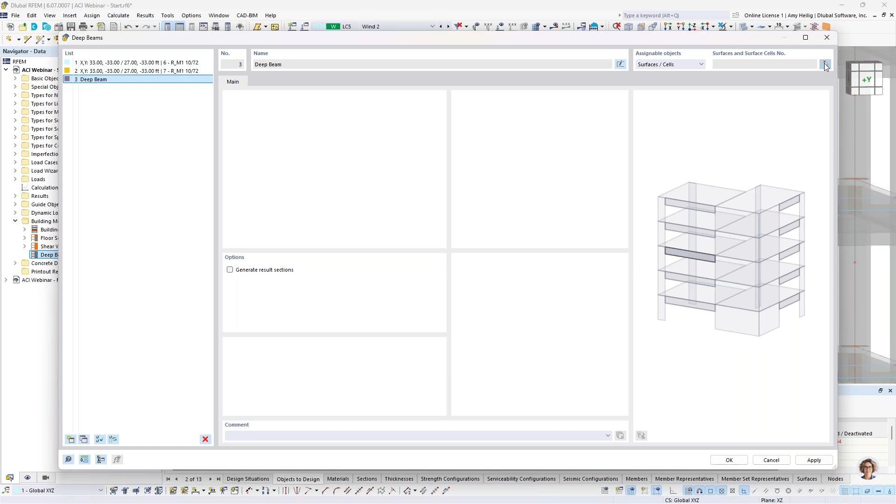I'm going to create my second deep beam that will span between the openings of the second and third floor. And finally, we are going to create our third deep beam that spans between those upper floor openings.

I'm going to highlight all 3 of these to generate the results sections and also to turn on the design properties with the coupling reinforcement that is specific to deep beam input.

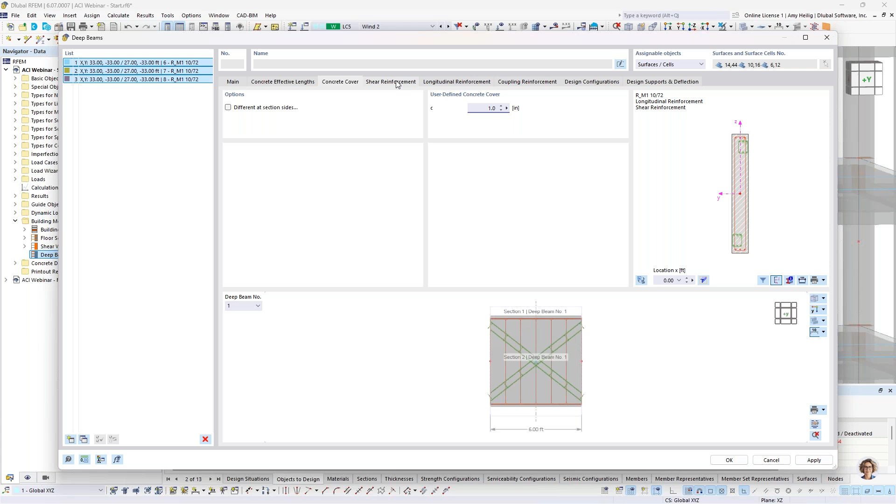The concrete cover will go ahead and modify this to 1 inch. And then we have the shear reinforcement. I'm going to specify number 5, similar to our shear walls, at 0.417 foot spacing.

We further have our longitudinal reinforcement. So for this one, I am going to select from my dropdown, uniformly surrounding.

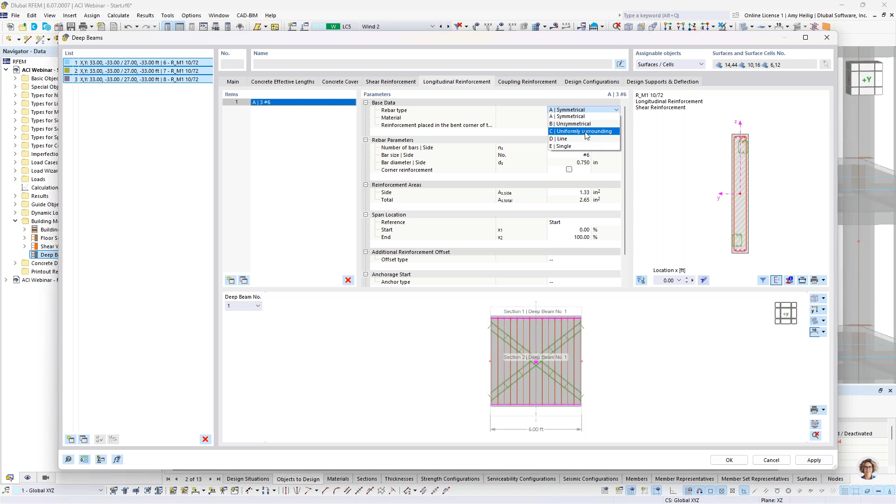We're going to place rebar at the bent corners of the stirrup with this checkbox. I'm going to select 30 number 6 bars, and the program will place those evenly around the perimeter of this deep beam.

Finally, we have the coupling reinforcement, which is new and specific to the deep beam design. The first input is the transverse reinforcement. As I click on it, it's highlighted to bundle these diagonal bars together. The default is number 3 at 1 foot spacing, which we'll leave as default.

We also have the diagonal reinforcement itself, which we can view here or zoom into in the cross-section view. This is 3 number 6 bars set at both the top and bottom. Additionally, we can set an anchorage or development length on either side of this reinforcement.

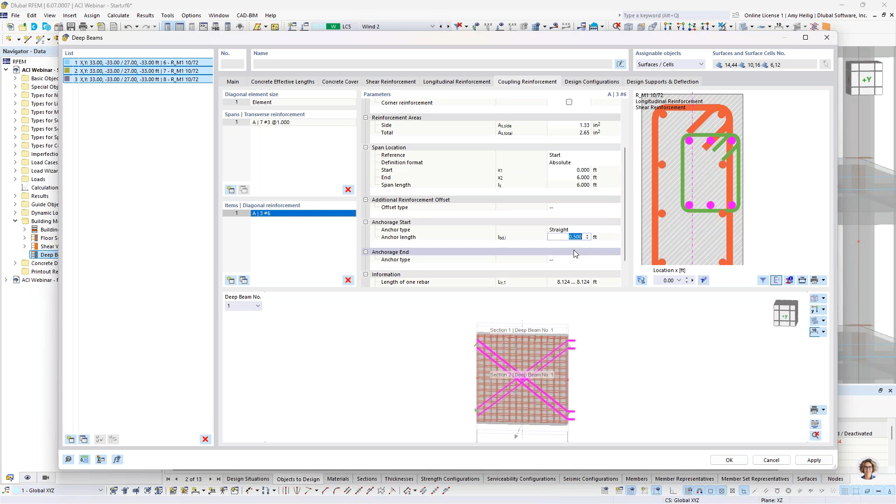To do that, we would select the anchorage type straight, and we could modify the length to maybe 1 foot. You'll notice the preview update here at the bottom. We'll set this development length to straight on the left side as well, with an input of 1 foot. That's all the input for this diagonal reinforcement.

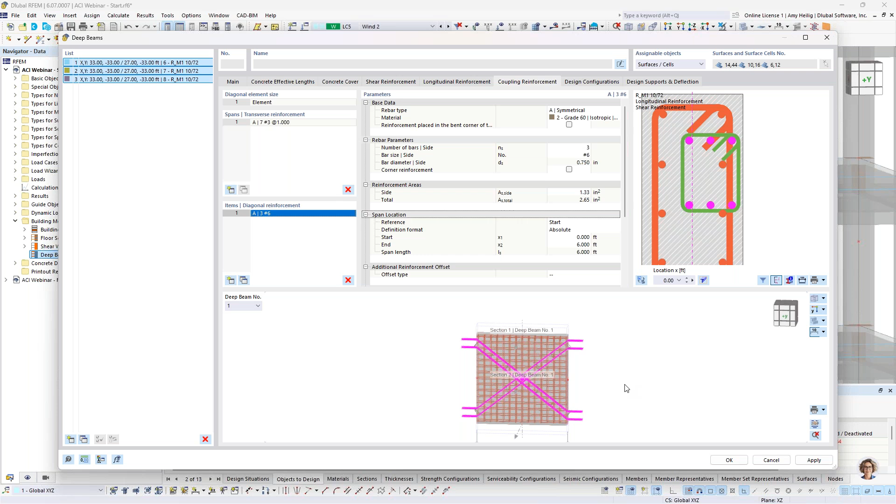The final thing would be the design supports, but in this case we just want to consider it supported at both ends, nothing further to do here. We'll click OK because we're now done with the reinforcement input for both our deep beams and our shear walls.

If we drop down to the concrete design add-on within table format, we have the input data, and as mentioned, here are those design situations. I'd like to take that first design situation, the factored load combinations grouped together, and set the limit state to the strength design LRFD.

We also have the factored load combinations that include seismic forces in the second design situation, so we want to choose the seismic design limit state from the dropdown. This carries out not only the strength design for these load combinations, but also the additional seismic detailing checks from chapter 18.

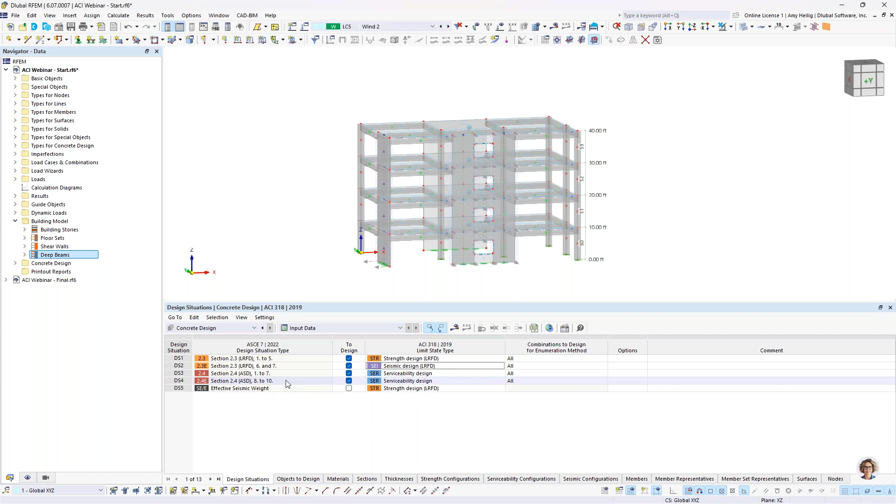We have 2 design situations for our unfactored load combinations. These are both going to be set to serviceability design.

Under objects to design, by default the program selects all objects within the model, but if we don't have reinforcement input for all of these objects, it wouldn't be possible to design them. We'll leave the design of the shear wall and deep beams active, but for my members, I'm going to graphically select only these frames on the right-hand side that I have input reinforcement directly. Once done selecting, we click OK.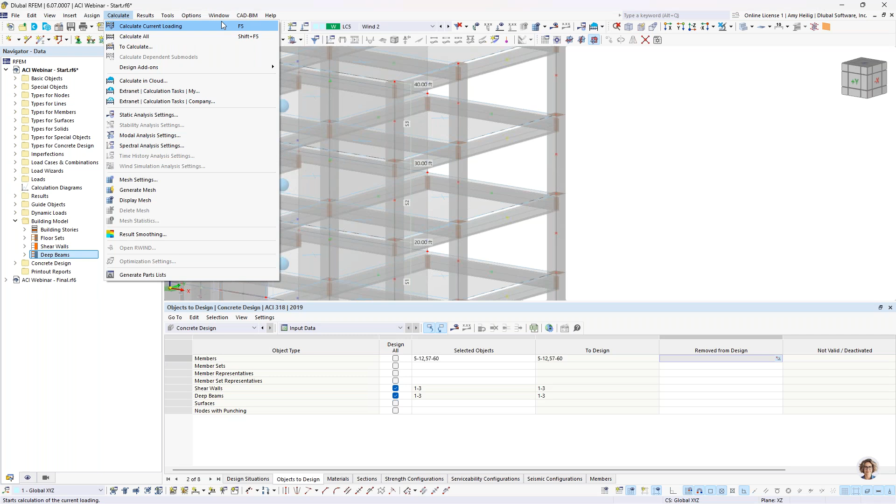We're now ready to run our calculation, so we would normally go to calculate all. It does take a few minutes to run, so in this case I'm going to jump to an already saved model where this calculation has already taken place.

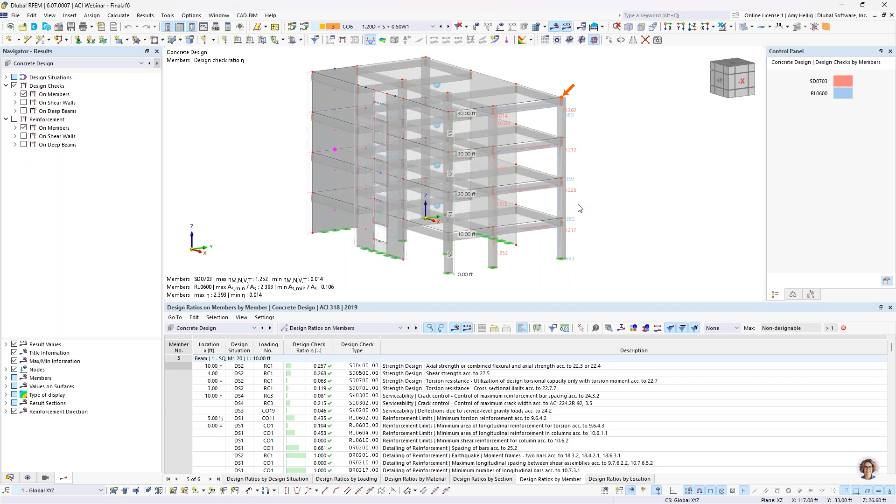What we see once we're done within the concrete design add-on is our results available in this dropdown, where we can view the design ratios on members, shear walls, or deep beams. If we jump to the design ratios by member, you'll notice that as I'm clicking within this table, we are looking at this top column here.

We can zoom in and see all of the strength, serviceability, reinforcement limits, and detailing checks carried out for every single member here. We can continue scrolling down through this table to see those relevant checks.

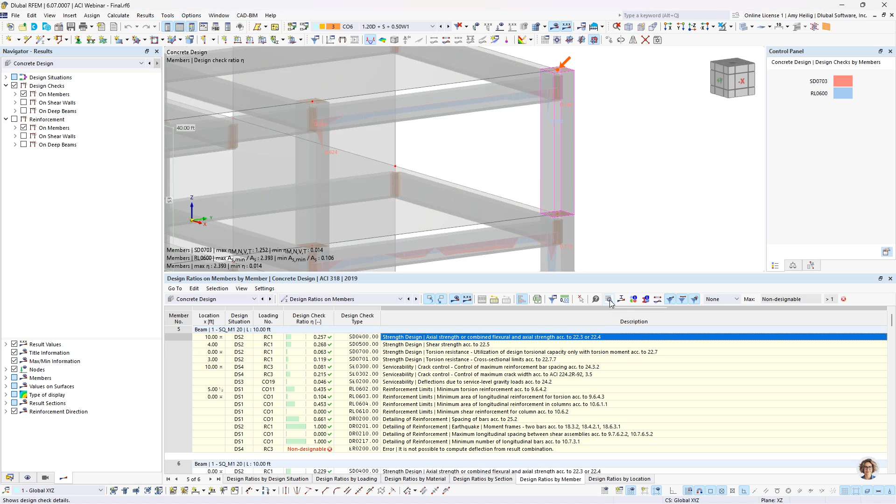For these specific design checks, we can always activate what we call the design check details, which shows us in detail all of the calculations, the formulas, the variables, and ultimately how this design ratio was calculated.

We also see here the design equations and references from the ACI standard, so we can refer to that directly within the code, trying to be transparent about where this information comes from so you can understand how this design ratio is calculated. Now for our columns, we can also activate here the interaction diagram.

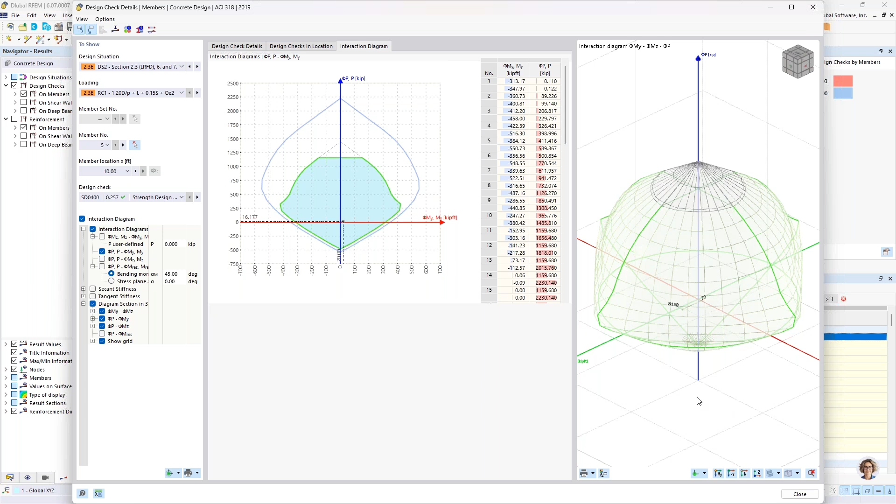So now we get an additional tab up here at the top where we can view this 3D interaction diagram, either graphically or in table format. We see exactly where we land within this interaction diagram. So this is certainly something that is user-friendly in terms of adding to our printout report or just understanding that column interaction diagram, the results presented here.

The same concept for our rib members. Notice as I graphically select one of these rib members, the table will go ahead and jump to that relevant member here. All of the design checks are shown here within table format. The design check details are available if we'd like to take a look at the references, code equations, and things like that. Now jumping to the design ratios of shear walls.

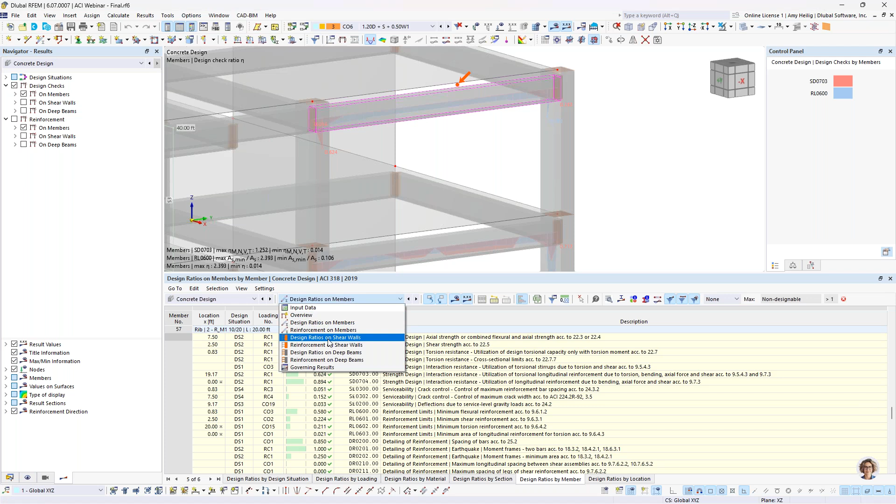If we zoom out here, you'll notice that we're currently looking at our first shear wall, and again, all of those same design checks. However, we're carrying out the additional checks according to Chapter 11. We'll also see here some of those seismic detailing checks included. Similar to the member design, we can activate the design check details to see exactly how this design ratio was calculated with the reference formulas here.

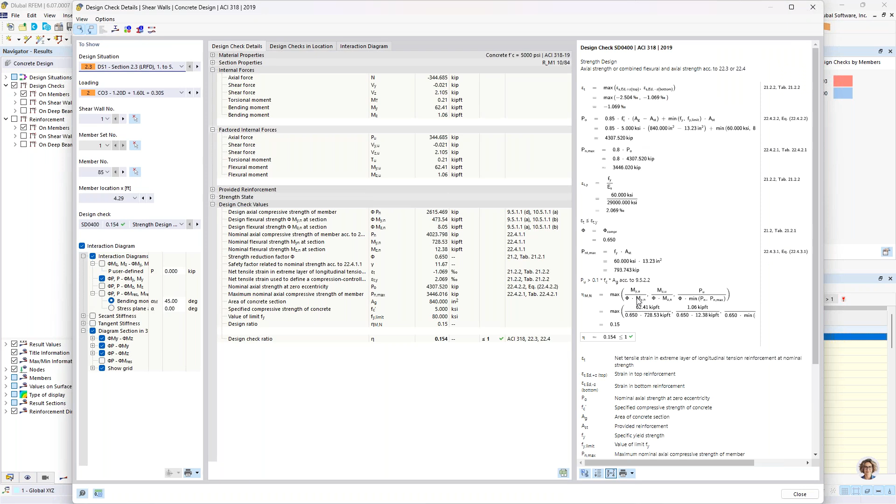Same thing for the design of the deep beams that we have designed. Now, everything is shown in table format, but it's also possible to show this graphically as well. For example, if I jump to a wireframe view and we're looking at this deep beam spanning between the two openings, we can turn on the design check ratios for our deep beams, maybe not necessarily the overall ratio envelope, but rather for each strength limit design check, I can turn that on graphically. You'll notice that we can actually overlay these different design checks of this deep beam graphically as well, depending on which design check we are displaying.

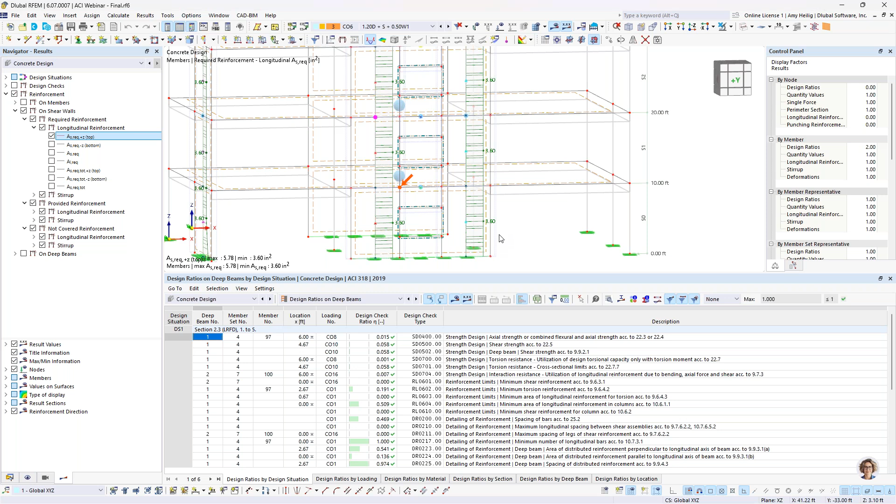In addition to the design checks, you'll see here the ability to display the reinforcement. We'll go ahead and turn on the reinforcement display for shear walls, and zoom out here. For my shear wall, I can display graphically the required longitudinal reinforcement, which is the reinforcement required from the static analysis. I can overlay this on the provided longitudinal reinforcement, so ultimately we hope the provided reinforcement is greater than the required reinforcement. If not, we can further display what we call the not covered reinforcement. So again, in addition to all of the table output, a lot of graphical options here under the concrete design add-on.

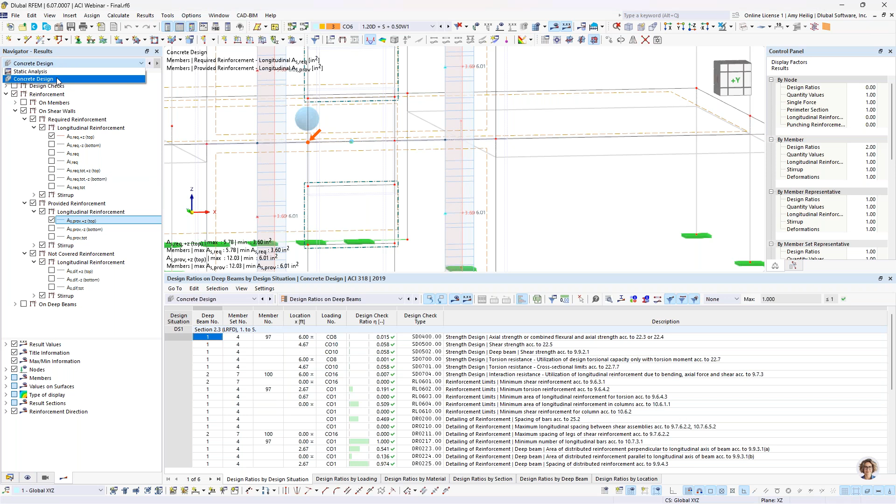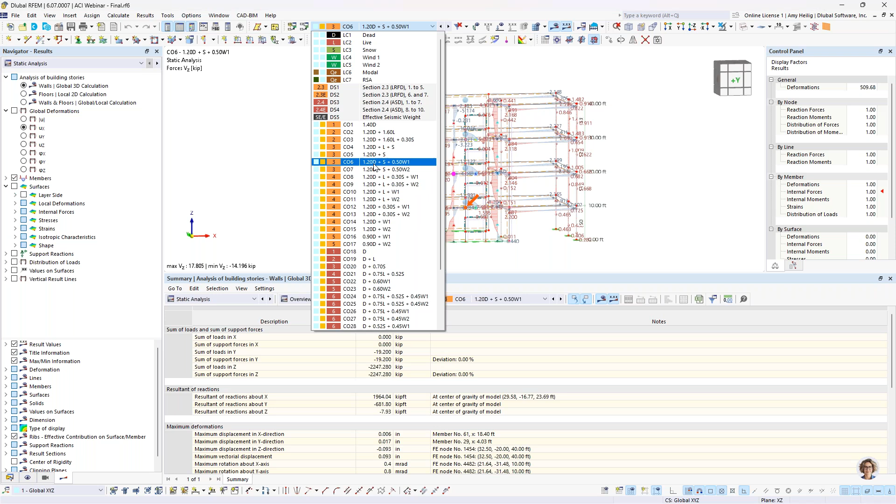Now, the very last thing I want to do is back up to the static analysis. We were just looking at the design results within the concrete design add-on, but we can easily toggle to the static analysis and choose one of our load combinations. For example, I'll choose load combination number 6, which is dead plus snow plus wind. We'll go ahead and turn on the display here of our structure.

You'll notice that because I have defined that semi-rigid diaphragm, or if we had defined a rigid diaphragm, we have additional settings up here under the static analysis results, including that 3D calculation. So we're calculating in a 3D environment, all elements are considered. We're running through all of these load combinations, both gravity and lateral loads. We're just going to modify the diaphragm stiffness for this global calculation.

In turn, we can toggle here to that local 2D calculation. You'll notice that we're only going to see results for the floor elements themselves because we're extracting each one of these floors in a separate submodel. We're placing those line and nodal supports, and then applying the actual stiffness of the surface element itself, and we run through again all of these load combinations.

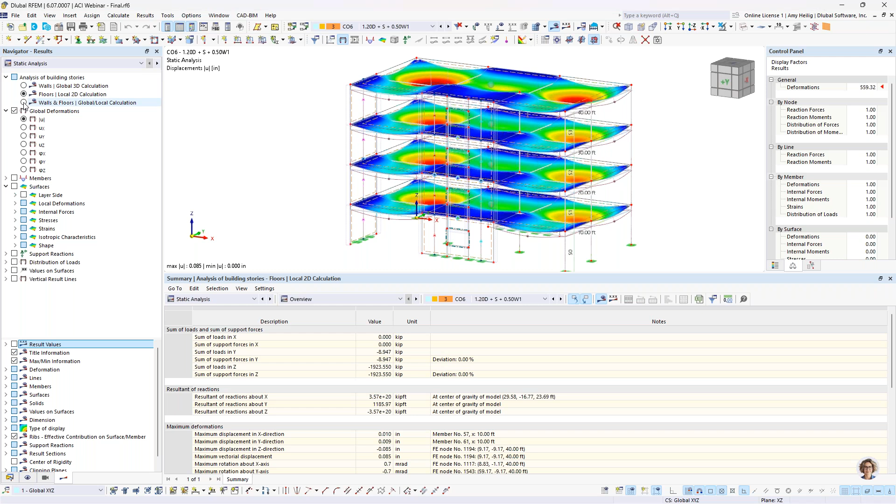Now, what's nice is that I don't have to sit here and try to interpret the results between the 3D versus the 2D, because we have this third option available. This is going to combine both the 3D and the 2D results by adding them together and presenting it graphically as one result. So again, very powerful that we're not just looking at gravity versus lateral, this is everything combined together. Not only graphically can we view these results, such as member internal forces, surface internal forces, but also in table format, and we'll see those results change depending on which option we have selected.

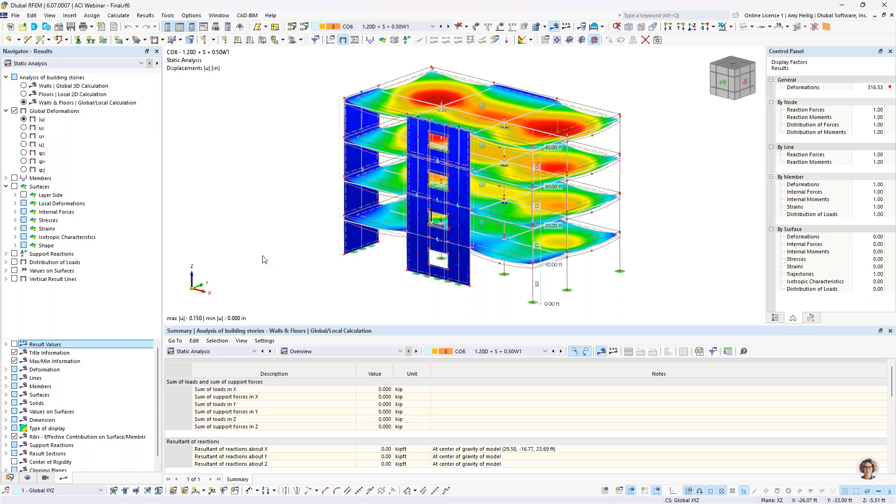As mentioned, we're working on that two-way punching shear reinforcement input. Currently the program just flags you if that reinforcement is required, but there's no way to input it. We will release that option in the near future, including for stirrups and headed shear studs.

In a similar manner, the shear wall boundary element reinforcement input. We're running this design check for shear walls, but we only flag you if that boundary element reinforcement is required. So we want to add an easy input option under the shear wall to input that reinforcement.

As mentioned, for those custom cross sections, we want to continue to allow additional design checks beyond bending, as well as additional seismic design checks. Currently we're just doing seismic detailing within the concrete design add-on, so we'll continue to elaborate on additional seismic checks like strong column and weak beam.

Nonlinear concrete design is currently in development. We previously had this in RFEM 5, but we're really improving it for RFEM 6, where we can account for the true cracked cross-section properties for both members and surfaces, and then consider that modified cross-section in both the static analysis and the design.